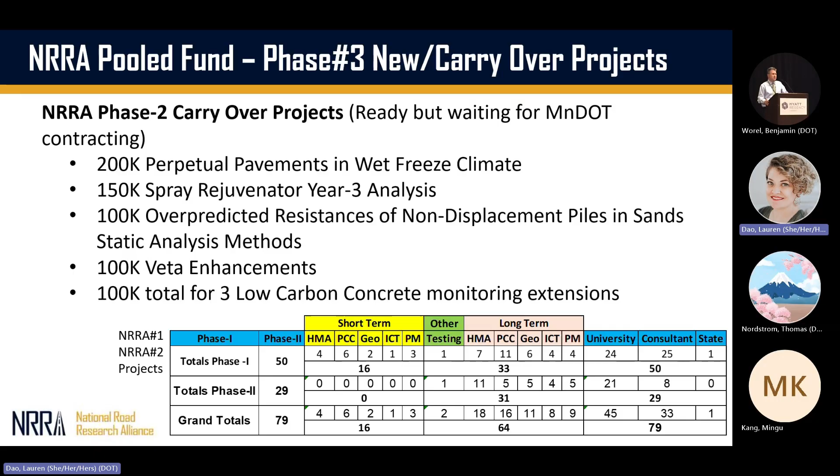So all of those are either in the process of consultant services releasing contracts, or internal MnDOT finalizing the RFP. So those will be finalized and posted within the next couple months.

The sooner the better, as far as we get our data, we get our plan sets, we can get everything moving, really working towards construction next summer.

So this call for research, there's a lot that still needs to be defined as far as the formal call. We're going to be having an executive committee meeting in the near future, kind of defining the parameters of this. But this could be research only projects, doesn't need to be MnROAD related. Really, it's the team's decision on whether they want to use that money for MnROAD related research or something else that fits their team's agenda. So it's really all going to be member driven as far as what projects get selected for research and construction ideas. So start throwing out your ideas, start planning, start brainstorming. As you're on the tour, start thinking of what type of research would really help you and your agency and your position moving forward as we start building this phase 3.

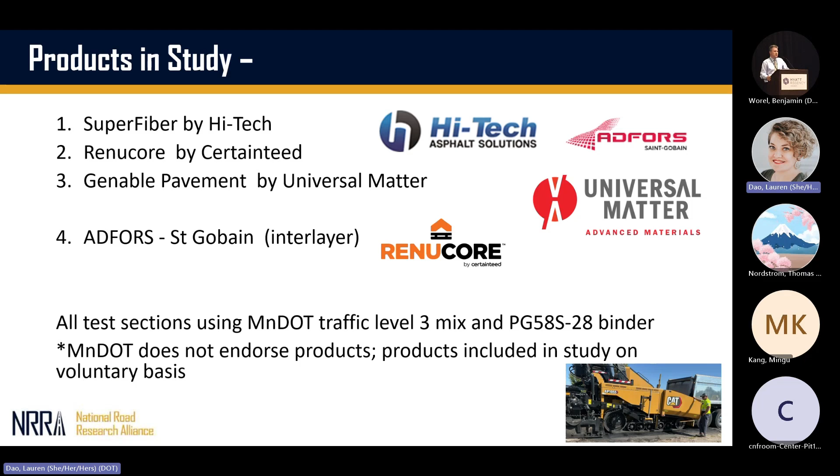We had Genable Pavement by Universal Matter, that's a graphene additive aimed at being an SBS replacement. And then an ADFORS St. Gobain interlayer, so between asphalt interlayer, looking at mitigating reflective cracking.

I'll show some of the construction photos real quick. This was all done with the Caterpillar paving team, milling and paving. So the partnership that we have with Caterpillar, the product participants purchased the mix from the hot mix plant and paid for the trucking, brought it to MnROAD. Caterpillar did all of the paving and compaction, everything else, milling on their own, with their team. So that was a nice tie with this, and we were able to cut some costs with that. So here's the glass fiber grid layer.

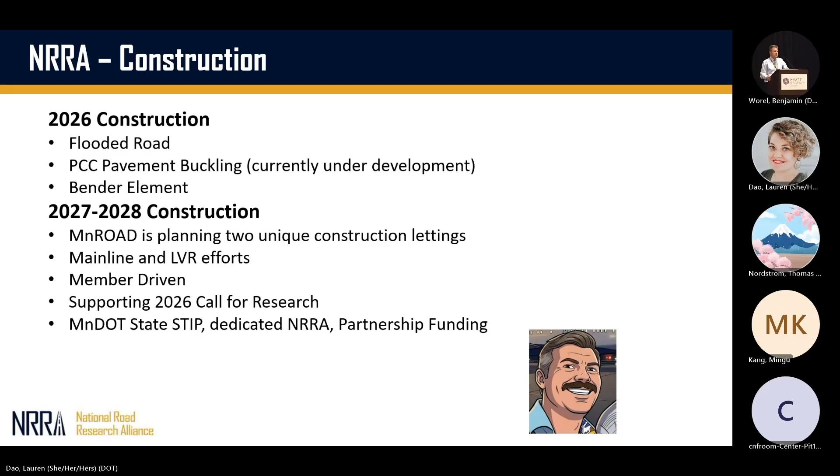Looking into my crystal ball of what we see, none of this is binding, just internal conversations we've had. 2027 construction is likely to be more rigid team, more concrete pavements than flexible pavements. The rigid team has a backlog, especially on the low volume road. With our CAT partnership, it's a lot easier for us to do smaller asphalt, low volume road experiments—there are a lot more asphalt pavers in Minnesota than concrete pavers. So it's easier to mobilize smaller asphalt projects than concrete, which means there's a bigger backlog of concrete test sections and experiments.

2028 also fits the cycle with the MnROAD and NCAT partnership. We'll be doing some new asphalt test sections as part of the MnROAD NCAT Next Pave Challenge. The way that study works, in 2027 they'll build test sections at the NCAT test track, and the following year we'll build companion sections here in '28, getting that north-south regional comparison.

I really want to encourage everybody to start brainstorming. We have some ideas to reclaim existing cells. We like to keep the balance between concrete and asphalt, reclamation and preservation, and geotech-specific test sections. We're not trying to dominate one way or the other—really want to start collaborating between the teams.

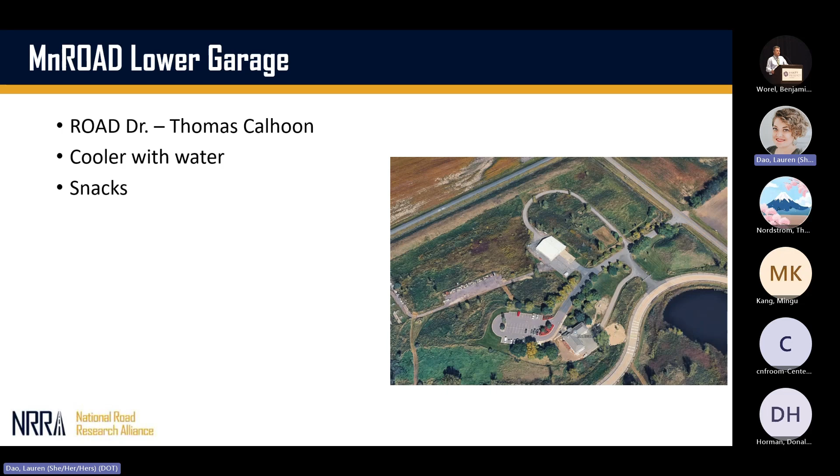We mentioned Renucore and Seismic in the main rooms, and we'll also have Thomas Calhoon with MnDOT's Road Doctor. We'll have snacks and a cooler with water - so this is really why we're driving.

Our first stop is the flooded road test section, which is in our stockpile area. To get there, we are traveling out of the MnROAD facility onto a public roadway. It's a mile away - we'll travel there as a group, but since it's a public roadway, we yield to public traffic. Then Jacob will talk in the stockpile area.

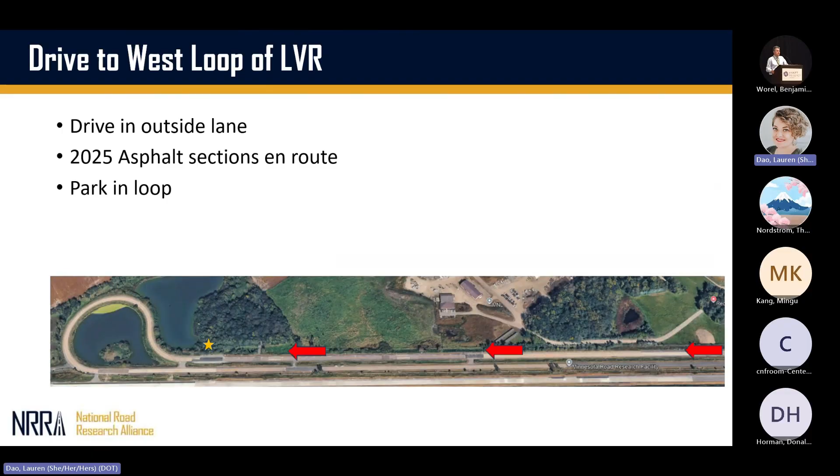Then we'll come back into MnROAD and Tom Burnham will talk some concrete. We'll move further down to Sharon and Raul, who will be installing the corner reflector sensors with the team from Auburn that we saw a presentation on yesterday. They'll also talk about geotech sensor stuff, and you'll get to see that corner reflector being installed. Then we'll make our way around the loop, talk asphalt and asphalt instrumentation, and head back to the building.

Last slide - I added a sling to this guy, so we miss you, Ben. We're thinking of you, and thanks.

My name is Joseph Podolsky. I'm the MnROAD Research Implementation Engineer, and I'm going to be presenting about data availability for the MnROAD database. First off, I'd like to thank Tom, who's here, and Mark and Ben, who's online, for their support and guidance through this whole process of rewriting everything dealing with the database. I'd also like to thank the other road research staff for their history dealing with the data.

Why does data availability matter? It matters because a lot of decisions at MnDOT rely on pavement roadway data. It helps for selecting and prioritizing projects and concerns towards CHIP and STIP, helps allocate funding strategically, and helps choose the right treatments. It also informs pavement material design specifications, like making changes within the specifications, and monitoring and forecasting performance. For example, the seasonal load limits shown here were built largely using data from MnROAD.

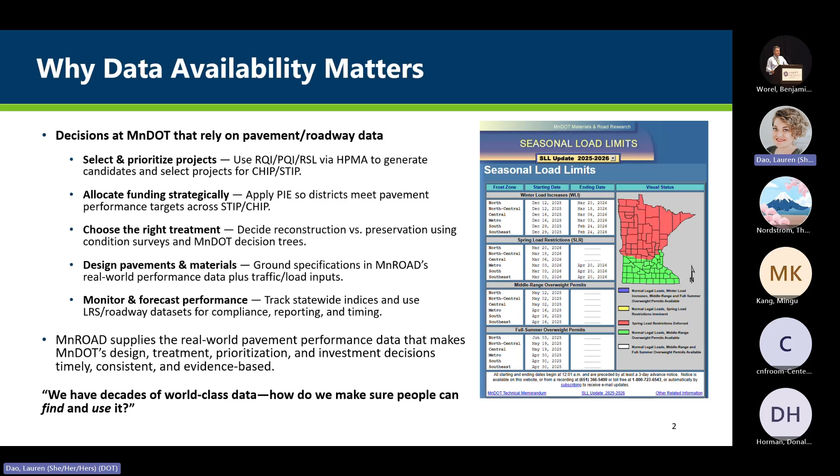We have decades of world-class data at MnROAD - how do we make sure people can find and use it? That's the biggest question. What's inside the database? We have materials and lab results, instrumented sensors with static and dynamic data, and traffic and loading data. Right now the traffic and loading is just the I-94 main line and the low volume roadway. We also have past data from Old Westbound, but that's no longer going to be part of MnROAD. We also have two on-site weather stations, and the bread and butter is the performance monitoring.

So we get distress, ride, rutting, all of that stuff. And then all this is integrated via InfoPave through the LTPP. And then you can search and look for and download the data. You can also request data from the MnROAD staff as well.

So when you make data requests, there is a request page online, but you can always contact Ben, Mike Wallace, or myself if you need something more specific. Because sometimes when you go through that page, you might say, I want everything, but then you're just gonna hear back from us asking if you really want everything, because you don't know what's in there. So it's good to talk to us first sometimes before you request it.

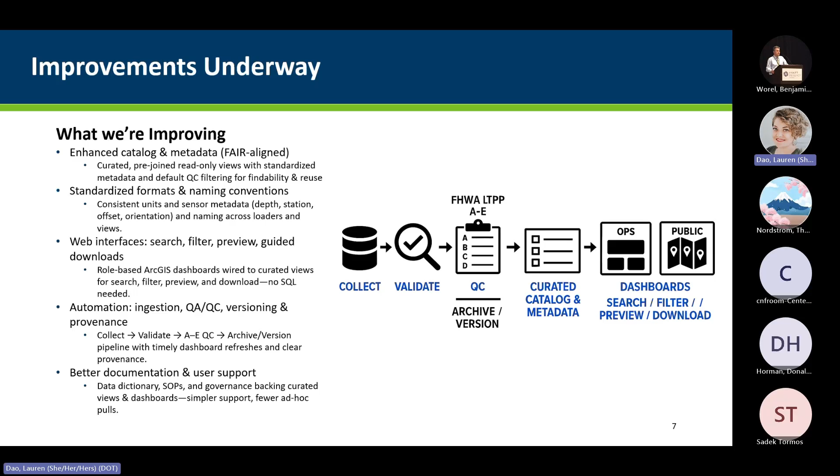And then as part of this process, we're also going to automate our loader a lot better. And then we're going to improve quality assurance and quality control checks. So we're going to add more of them onto our data, so that way there's a quality check, like there'll be a value added to that data in another column. So then you can be reassured that the data is high quality.

Also, if people get data from here, they can use the MnROAD IDs that are attached with those samples, so that way it's a lot easier for us to figure out, when people do publications, that we can connect that to a study. Because we're also trying to add a table that connects different papers and reports to different test sections.

So the value to MnDOT and NRRA is we're trying to move towards the direction where we can do faster analysis and better decisions. We want to reduce the rework and duplicated effort. We also want to gain stronger collaboration with partners, both internally within MnDOT and nationally as well. And then we want to have more impact from past and ongoing investments.

So how can you all, I guess, help us as well as us help ourselves? It's share priority research needs and data use cases. Like, what data are you actually asking for, or what would you be interested in asking for? Not many people look at the database that often or really deep dive into it. They don't know what's there. There's a lot of useful data in it. It's just very underutilized right now.

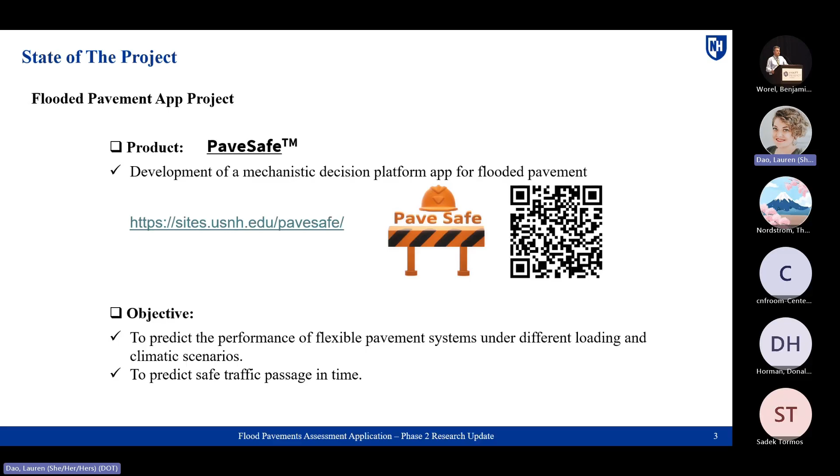The QR code brings you to the website, and basically there are publications there and everything related to phase one. You can download them. So version 1 is already available. The goal was basically a decision platform for flooded roads and also to help us predict the performance. The focus was mostly on flexible pavement, for different loading and climatic scenarios, and ultimately to predict safe traffic passage.

The first phase of the project was a lot of system analysis. We wanted to see what the key influencers are in this whole analysis, and we spent quite a bit of time on the system dynamics analysis. Then we did different types of single variable and multivariate sensitivity analysis to identify and rank the important parameters impacting the response of the pavement after flooding and during flooding. And that led us to version 1 of the PaveSafe app.

Basically, it's designed to be simple but mechanistic. There's lots of mechanistic modeling behind the scenes, but the face of it is pretty simple. Just put in the pavement information, the structure, the geotechnical information, your precipitation scenario, your traffic type, and you can define the threshold and say, okay, it's open for traffic after 24 hours, after 48 hours, flooding and rain. Maybe you have 2 consecutive rain scenarios back to back. All of that can be modeled. I'm not going into detail on the modeling piece. I just wanted to introduce how the software works.

Then we got phase 2, where the focus was mostly on computationally enhancing the model and the application, and also using the available data to validate whether the performance is really good. There were different tasks. We are almost toward the end of phase 2 as well. We wanted the experimental and numerical part to be robust, so it took a little longer. We are hoping that sometime at the end of summer we are done with this project, and the actual platform for version 2 is already ready. We're just waiting for the final independent numerical model to finish so we can do final validation and release it. Otherwise, the actual platform for version 2 has been ready for a few months.

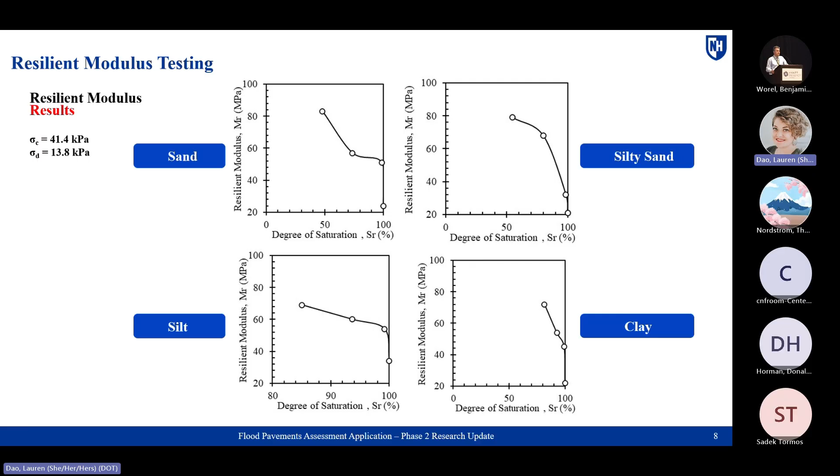This is probably something other people have done, but we wanted to have a good idea in our model, and we could see that as the degree of saturation gets nearly saturated, the resilient modulus drops quickly. That's intuitive, and I'm sure a lot of other researchers have seen this.

The part that took a lot of time, we wanted to do more physical model testing. We built a setup at University of New Hampshire, and we wanted to not only load and simulate a traffic scenario, but have good instrumentation so we can capture the response.

The setup is basically a pit with soil in it, and at the bottom we have a network so we can drain and insert water to control the water table. There's lots of instrumentation in and out. This is the actual hydraulic actuator that we control, and we can apply any type of transient load that we want.

So there are different types of scenarios. We have load sensors, moisture sensors, and a laser transducer at the surface to capture the surface profile. We also had pressure sensors to see how the pressure profile within the soil is - that's important. And we have pore pressure sensors for the tests that are fully saturated, to see how the pore water pressure changes because of dynamic loading, which could cause liquefaction in the soil. So these are the sensors we have.

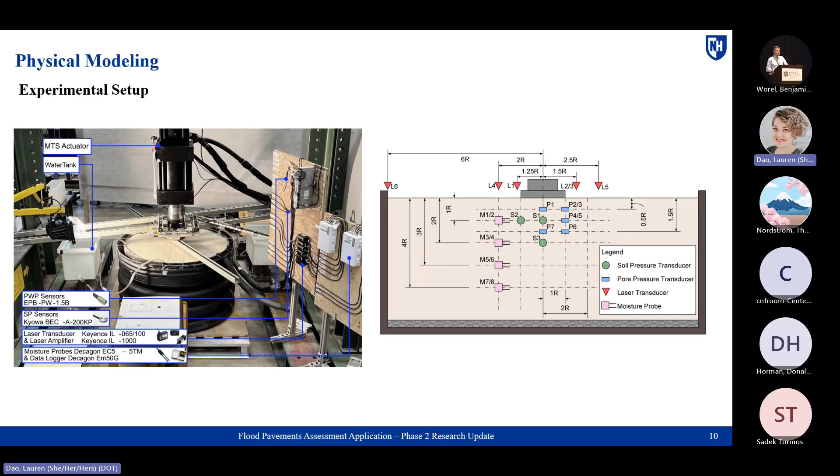This part, the task is complete. The report is on the NRRA website. If someone is interested to get more detail on the results, I'll just review some of them. Basically we did about 32 tests.

We did relatively large scale physical model tests on sand and clay, at dry, optimum compacted, off of optimum, and fully saturated conditions, and we controlled the water table and ran salt tests to see if the water table moves. We apply a half sine cycle with rest time between to replicate traffic, and we measure surface settlement, vertical settlement, stress propagation, and pore water pressure - all of them.

A few of the results, for example, this is the results of one of the pressure sensors. Each box is for a different degree of saturation at shallow depth. On the left side, these are all the inputs, the envelope of cycles. We apply 105 cycles of pressure, but if you take the envelope, the peak of those, there's a delay because it densifies at the top - it takes time to reach that 100 kilopascal. Interestingly, for different degrees of saturation, what the sensor measured was either higher or lower, and that's because of the stiffness of the soil. You may have a lot of relaxation in the soil, or you may have stress concentration in sand and other materials - different materials behave differently.

This is also discussed in soil mechanics textbooks - if you have a rigid foundation versus a flexible foundation, clay versus sand, the stress concentration at the middle and the edge are different. This is traditional soil mechanics that we teach in all the classes.

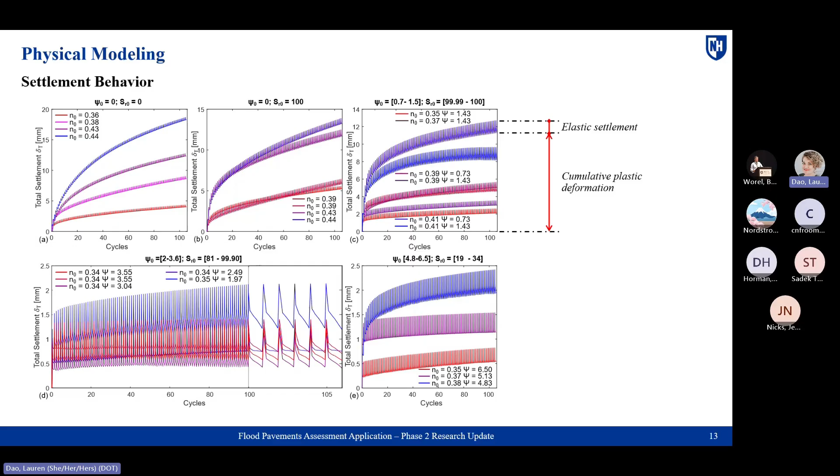And with that, we could define two types of stiffness: the secant stiffness, which basically considers all the deformation, and the so-called resilient stiffness. We looked at how that changes with respect to porosity and the suction level, which represents the degree of saturation. It makes sense that as you increase suction from left to right, you have more stiffness, since the soil is stiffer. We defined the suction as representing about half a radius in the surface near the foundation.

The other piece we try to understand is the surface profile of the loading, because we have a laser transducer across the surface. As we load, we could match or curve-fit these deformation profiles. We could see how that profile changes based on different porosity and different degree of saturation. That's another piece, but I'm not going to go through all of it; I just want to show what's in there. If you're interested, the experimental part alone is about 200-300 pages of documentation.

Another interesting piece we were really looking into was the pore pressure sensor data. We have pore pressure sensors right underneath, on the side. There are interesting things we observe. Of course, we expect that as you load it, the pore pressure goes up, but during the unloading phase, there is a movement of water, meaning the pore pressure reduces as well. That's something we're also seeing in the numerical part, and it's really hard to capture in a numerical model. So that's one piece we are working on.

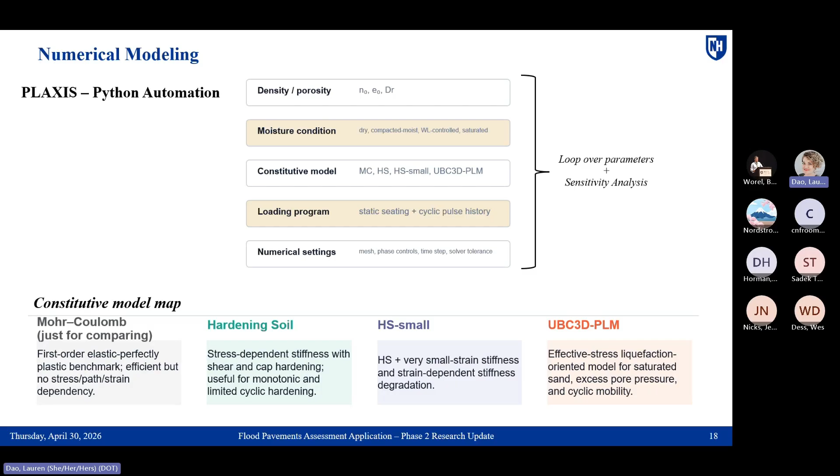There was a lot of challenge because the deformation is large at the very beginning, so it passes the yield point of the soil, and every time you load it you get a lot of plastic deformation. So we needed to adjust the soil strength properties a little bit so we could trigger the hardening every time. That took a lot of time.

We got some modified system that now works well. If you look at the hardening soil, shown in green, versus hardening small, the hardening soil model used to jump into large deformation without a nice transition. This report will be very interesting, with lots of geotechnical and geomechanics modeling in there. We are very excited about the results. Now we can capture the hardening response, and we have more permanent deformation at the beginning compared to the last cycle.

After that, we do the sensitivity analysis. This is ongoing, and hopefully within a month or so, we'll have the report ready for review by the team.

So the PaveSafe version 2, as I said, the platform is ready. The goal was to basically enhance what we have, the user interface, and also a lot of validation.

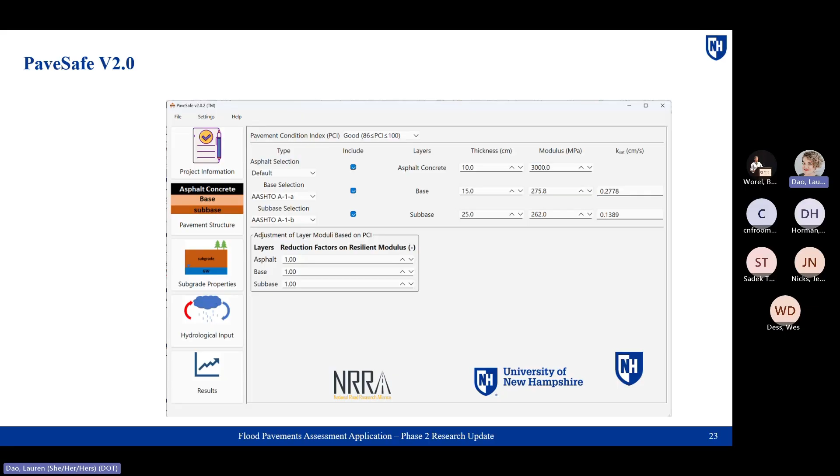We did a lot of searching across the country. There is not a well-instrumented system that we could use to validate. So we have the physical model, we have the numerical, those are good validations, but it's still not enough.

So this is a run of the new version of the app. It just shows different components, and we did a lot of different pieces in it. Basically, the geotech piece, the structure piece, the scenarios, they're all more advanced.

Computational is much more faster, and then you can put any precipitation scenario you want. We added even custom loading scenarios. You can put your loading scenario, you can put FWT, all of that.

So at the end, it tells you the road closure, caution, should be closed, all of them. And basically, as I said, the platform is ready. We're just waiting for the final validation, and we'll hopefully release it sometime end of summer.

So lesson learned, just because the session is lesson learned: there's lots of fundamental and practical knowledge developed just for understanding the response. These are available in publications and reports. If you are interested in this area, I encourage you to look.

You have the app, that's the product, right? It's good to have research that ends up in a product. Version 1, and now version 2 is coming.

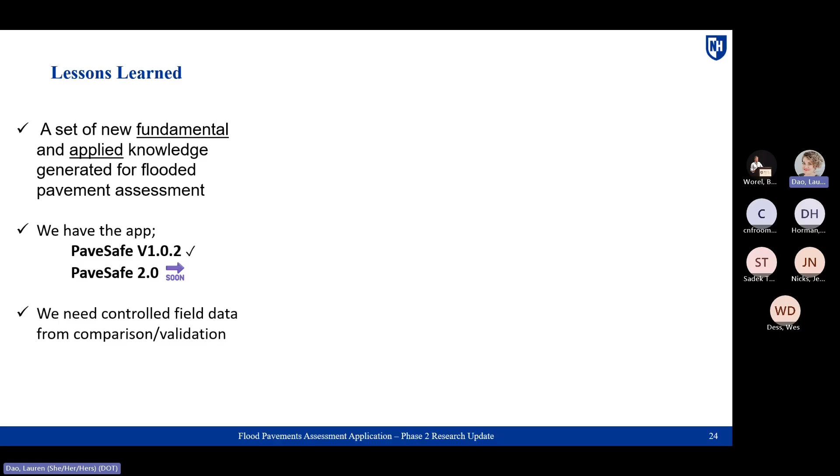And then lesson learned was we need a controlled field validation system. The flooded road section is perfect. I gave the lesson learned to AI and it gave me this.

So the flooded road section that you are going to see will hopefully provide a good tool, not just for this research, but for any other person who is interested in investigating it.

And it's interesting that the UNH team doing the analysis, they have a coffee. They even think that when you do modeling, you need coffee.

So, and I'm available throughout. If you have questions about the app or anything else, I'm happy to answer.

What we have is research on the water repellency technologies and the section that was built at NRRA, to check if it works or not.

And we have two researchers from Michigan State, Qasim and Mohammad.

I don't have time to check with Qasim because Qasim has a military background. I think you're a colonel, right? No, major. So I think he's gonna be... Thank you so much. That puts me under more pressure, I guess.

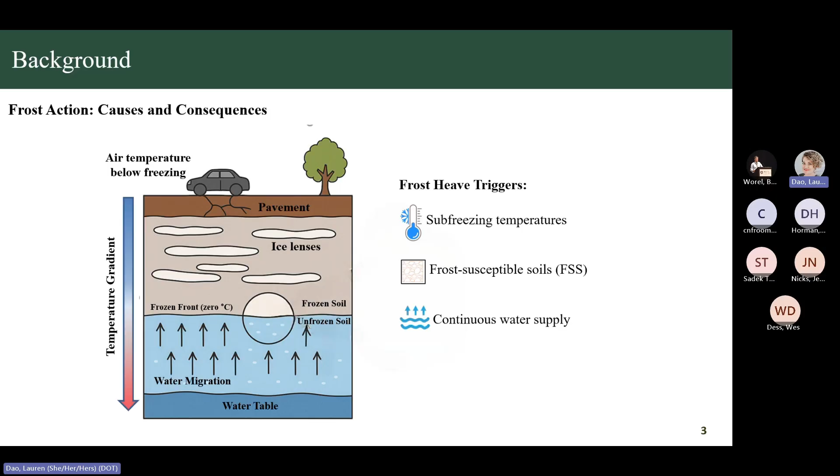We do that with the application of an organosilane chemical that is sprayed on the soil layer, which ends up acting as a capillary barrier for the water.

This stops the capillary movement of water toward the top of the pavement layers, and we call the complete mechanism engineered water repellency.

So as I said, we have to treat the frost susceptible soils with organosilane chemicals. How the chemistry works, I'll briefly tell you. We have this silicon-oxygen-silicon bond formed once the organosilane reacts with the surface of the soil layer, and it forms a dense, thin, water protective layer which makes the layer hydrophobic.

Once applied in the field, it results in controlling the capillary action of water from the unfrozen soil layers towards the frozen soil layers. So I come to the goal of our presentation, which is to evaluate the use of organosilane to control water and increase the overall pavement performance.

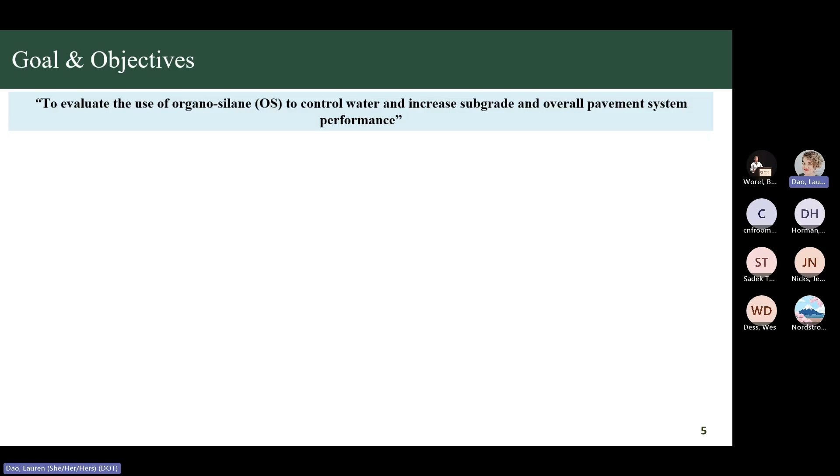We have different objectives with this goal in mind, starting with soil characterization. As I mentioned, this is a silicon-oxygen-silicon bond, so it's important for the soil to have silica-rich chemistry.

Since these sections were being constructed at the MnROAD testing facility, we collected soil from the testing site and ran XRD and structural analysis, and we found out that the soil is indeed silica rich.

After that, our colleagues at the University of North Carolina, Charlotte ran physics-based models to come up with an optimized depth for the application of the EWR treatment. They came up with the number of 3.94 feet.

It's important to note that this number is not a design depth that we're recommending to users, but it was the number we used for our construction of the testing sections at the MnROAD facility.

So we went ahead with that number and constructed two cells, a control section and a treated section at the MnROAD facility. Both sections had Class 5 Q aggregate as a base layer, and had a combination of different sensors: moisture sensors, matric potential sensors, along with the shape arrays.

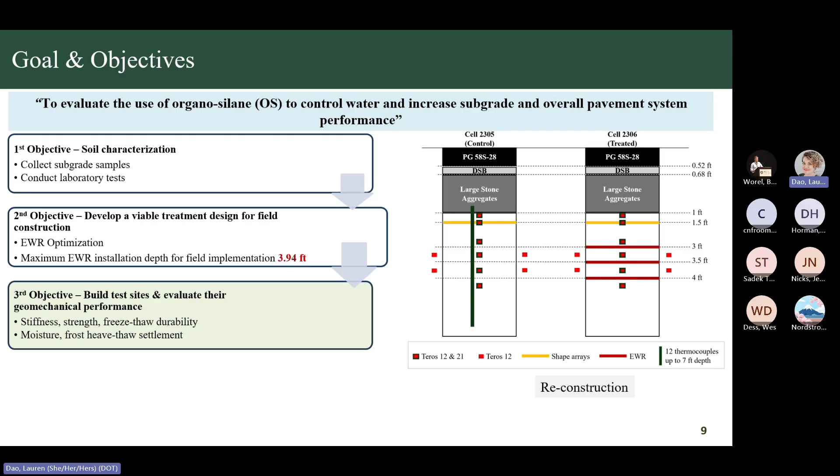With that, we started collecting measurements from the moisture sensors and temperature sensors, and then we went ahead with the modeling part, which will be explained by my colleague here.

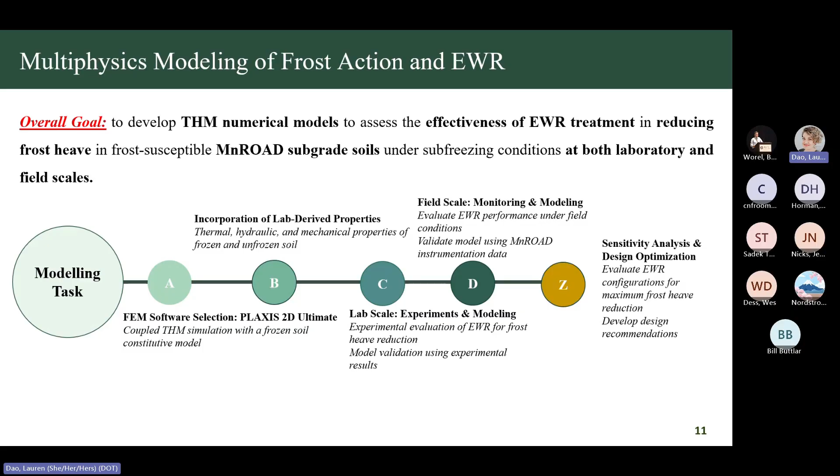Now for the field, it's a little bit tricky. How do I select the geometry and boundary conditions? But we have sensors and some analytical solutions to find the depth we actually need to model, based on where the temperature is constant and not affected by seasonal changes. We have much more detail, and we're writing the report for this, so it will be published soon.

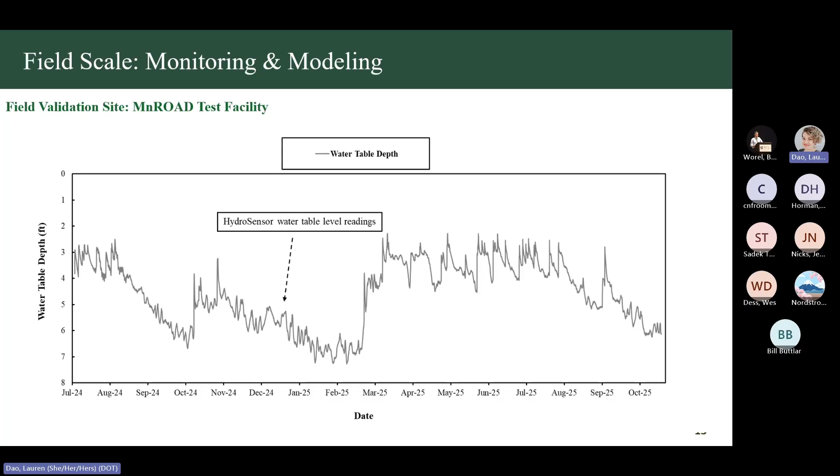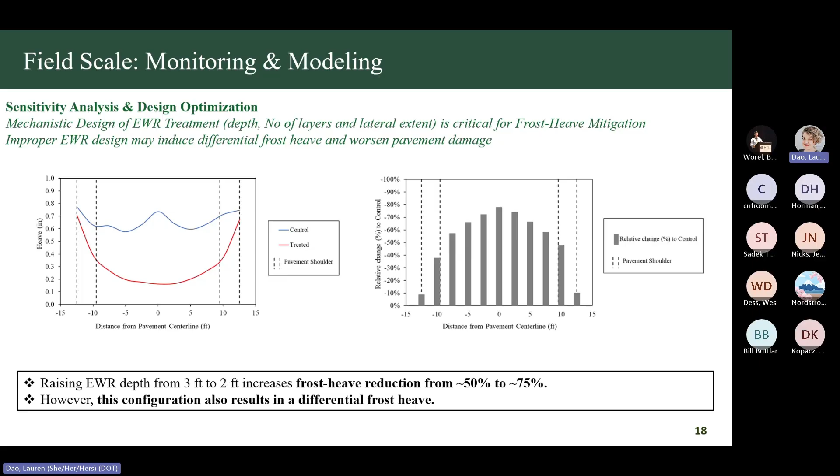So we did a sensitivity analysis. For example, raising the EWR up 1 foot showed now 75% reduction, but we still have differential frost heave. So what's the solution? We found the solution is to laterally extend the EWR past the pavement shoulders. Now you'll have about 90% reduction in frost heave, but also minimal differential frost heave produced. So the lesson is that EWR really works, but it's a little tricky, so you should design it carefully.

And the mechanistic design is more important, like how many layers, how much lateral extent you should use. And as I said, improper EWR design could cause differential frost heave. And lastly, lateral water movement is important in frost heave because once we block the water from the bottom, the water was building up above the EWR layers.

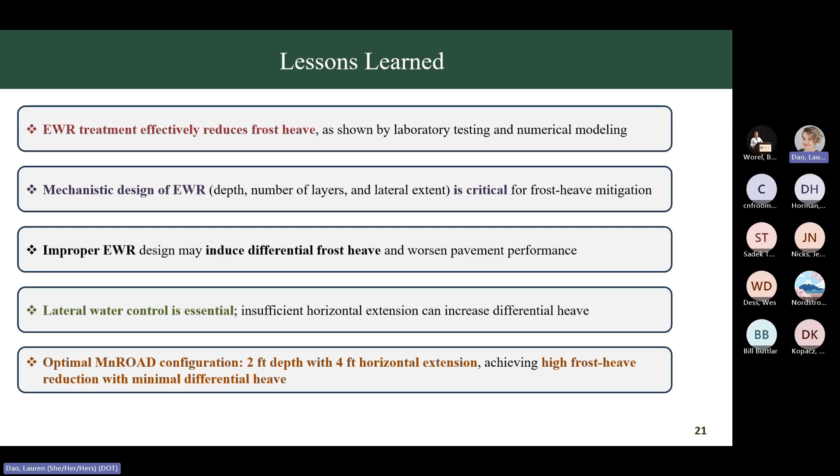So finally, the optimal MnROAD configuration based on the suggestion from the model is 2 feet depth with 4 feet horizontal extension to achieve the high frost heave reduction.

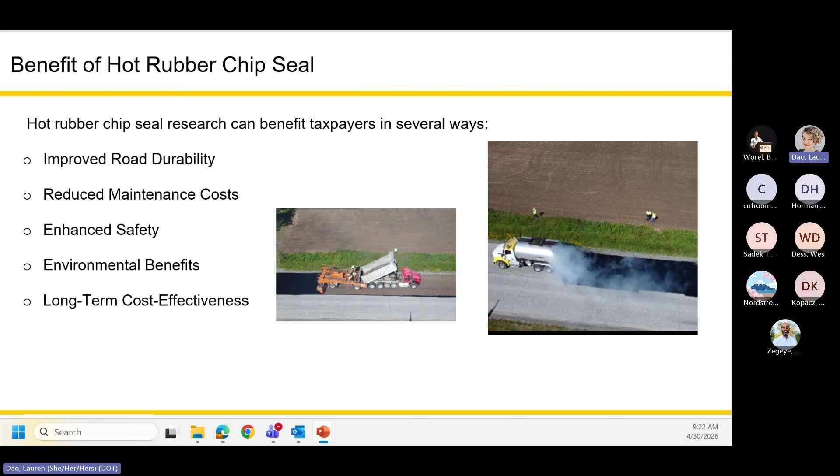So of course, one thing we find out is it improves the durability, and the maintenance cost in general is going down, and it enhances safety. Of course, there are a lot of other benefits like long-term cost effectiveness. So that is according to some work we did with counties and cities.

So the research work here, the major report we have here, one is really about literature review. We continued the literature review effort and constructed lab testing protocols, and then did the field construction and also field testing. And right now we are in the final data analysis and preparing the final report.

So over here, the rubber content added to the liquid is about 22%. Of course, we can run up to 25% in the past. So this kind of asphalt is going to be high viscosity. Of course, we did a lot of other testing, and I will show you that in a second. And in the project, we also used some control sections using the conventional emulsions, right?

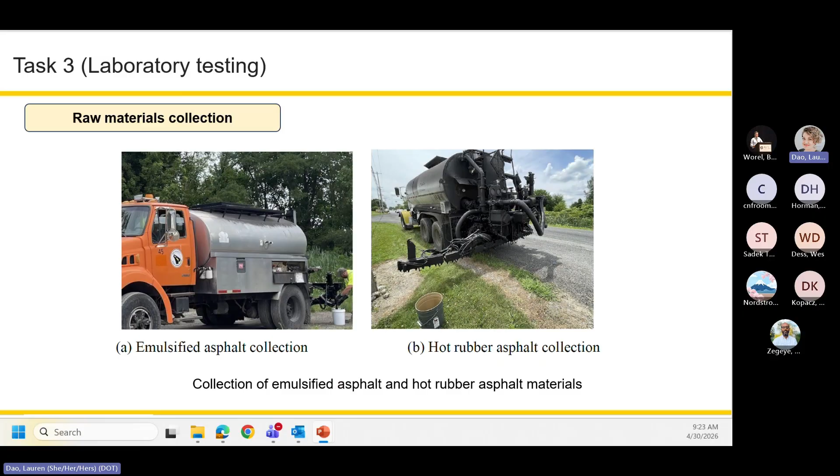And for the emulsions, for the chip seal side, we did a lot of other testing, including the sweep testing, surface friction, and of course, the fun testing we did was the strength. So we tested both the tensile strength and the shear strength. We will have that data in just a second.

So for example, this is the sweep test. We are trying to make sure there's no aggregate loss after this many cycles of sweeping, and also test the surface friction as well. And one of the tests we did is freeze-thaw testing: 6 hours of soaking in water at room temperature, then freeze it at minus 18 degrees C for 6 hours, and then thaw it again for 6 hours.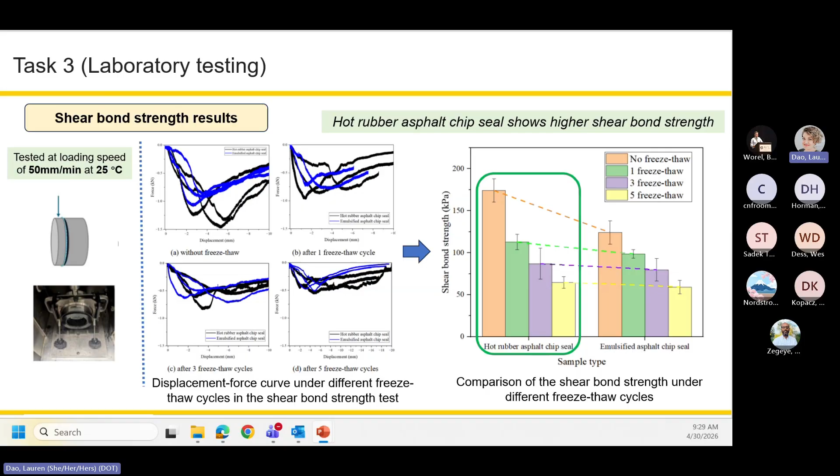All right, those are 2 major tests we did. We had a large amount of testing, and we took pictures of those samples, and that is basically the in-house testing. And then we moved to the field. The test section we built is in Bay County, M-25. The traffic on this road has picked up. It's not really a heavy traffic volume road in Michigan, but it's a pretty decent traffic area. So location-wise, it's pretty ideal for the construction.

This is a 2-lane road, roughly about 6.6 miles. What we found out is the first 5.6 miles or so, the condition was a little better, and the other stretch, the condition was not as good. The PASER rating is very low. And of course, Tyler has the IRI and all those data, and we're going to use that for the report as well.

So what we did here, the first segment, roughly 5-point-some miles, is using rubber asphalt with coated aggregate chips. And then the last section, we used a different design. We're trying to give different combinations of strategies. So here is a really quick video showing the construction.

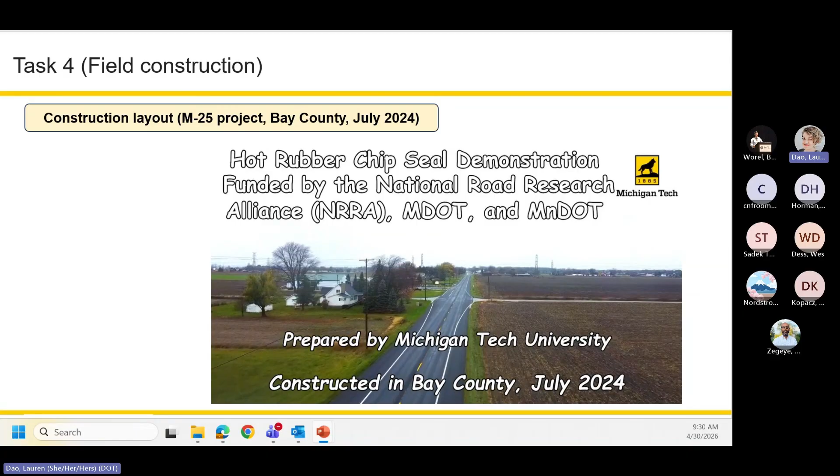If this thing can show, looks like it's working even though there's no sound, but that's okay. I did use AI to make some interesting things there, but we don't have to hear that.

It's one of the decent projects we did. Like I mentioned, we've built 300 lane miles already, and this is part of our plan. This year to 2026, we're going to have more construction ongoing. This is the rear truck. The truck needs to maintain the temperature so that the rubber asphalt stays workable. This is the plant where they prepare the coated aggregate chips. This is not required, but I think it's a good way to make sure we have good retention of the aggregates.

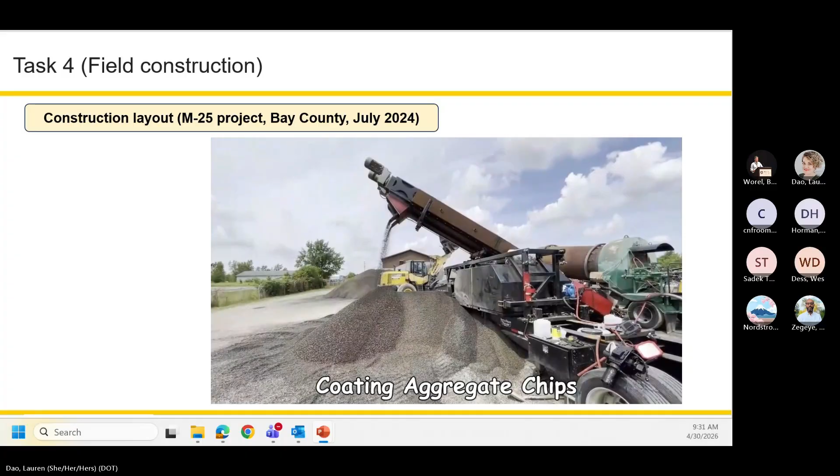One key thing here is the asphalt content should be low, not too high. In the construction site, you can see we're starting to spray the hot rubber asphalt. For this road, we're spraying roughly about 0.55 gallon per square yard, so it's pretty thick rubber asphalt.

Those are vapors. The temperature here right now is pretty high. We are also working to see if we can reduce the temperature. Right now it's running about 400 degrees.

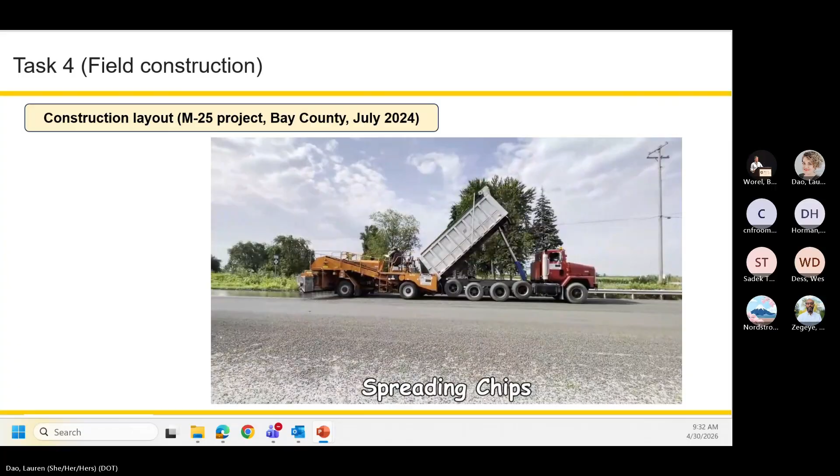This is how we spread the chips. You don't want to step your feet on the asphalt. After the chips are spread, we just do the compaction. After the chips are spread, we just do very light compaction.

The construction can be really fast. If we planned this 6 miles of stretch construction, during the entire construction it's very short. If you just come there late, the things are finished already.

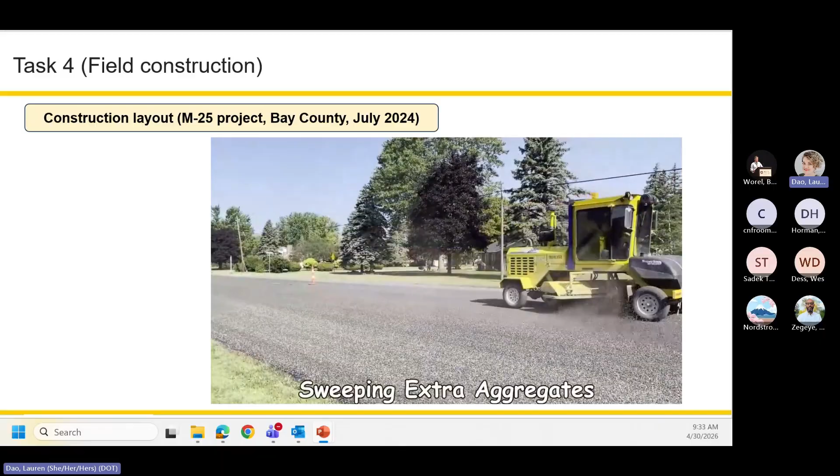The last step is sweeping, just to make sure there's no excessive amount of aggregates. Usually we don't apply too much aggregate here. So that's pretty much the construction.

All right, I'm going to click the next one. So what we did is after the construction, we also did some other testing. Tyler is doing other testing, but we did some smaller testing, such as the field pull-off testing. After the construction, like 3 days later, we did the pull-off testing.

It's almost like a tensile test, bond strength testing. But the thing is really hard to control the temperature, because whatever temperature we're given that day, one spot is 13 degrees and the other spot is 116 or 117 degrees, whatever temperature we have. So we just measure those strengths.

You can see the pull-off force is roughly 220 or 240 something PSI, and then we get the average number. So what we have here is that the rubber asphalt gives pretty high numbers. We do have the conventional asphalt as well.

I mean emulsions - for example, this one is after 3 months of construction. You can see the emulsion-based one at 77 degrees Fahrenheit was 332. But under 86 degrees Fahrenheit, the rubber asphalt was 345. So no matter what, the rubber asphalt still gives you a pretty high pull-off force there.

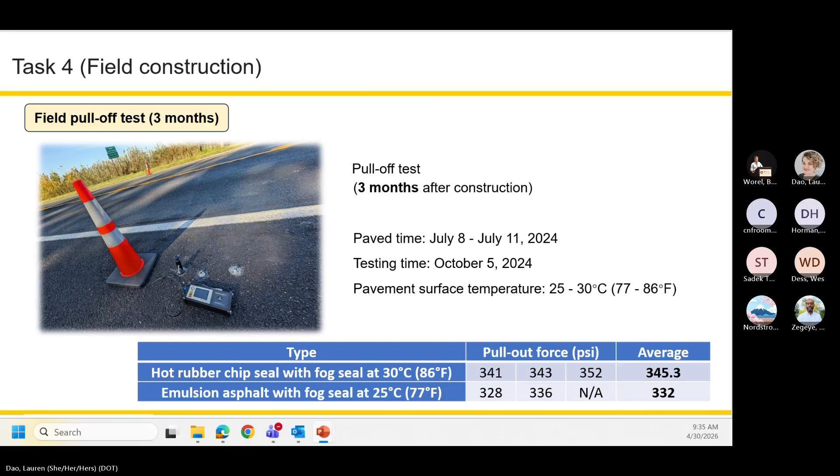With that, we are closely working with Tyler, and I appreciate the effort - NRRA for supporting the project, and also MnROAD for helping this one. So with Tyler coming up here, we have a really nice team, including people from different states. That's all I have.

I can - Tyler already volunteered to answer any questions or give any remarks. I was supposed to moderate you, and I apologize. Oh, I did it by myself already. Up for it now - anyone have any questions for Dr. Yu?

That's a very good question. So we actually measured those things, yes. I think roughly about 80% or so. Thank you.

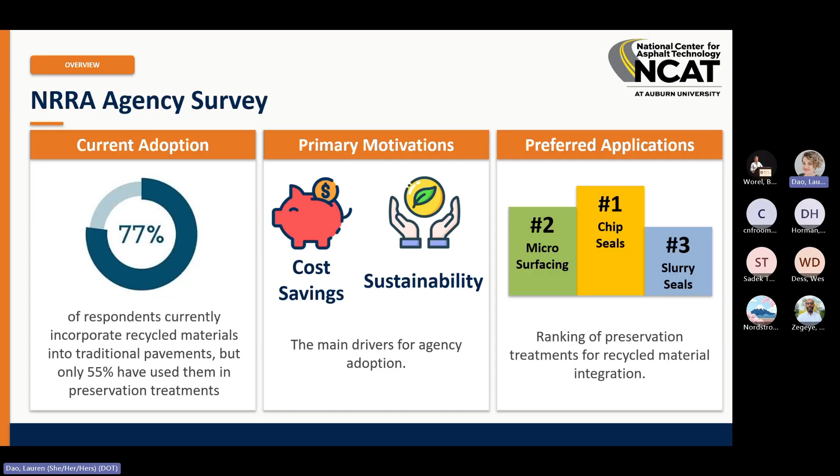Once we started looking at the responses, that included things like, well, we've used RAP in a thin overlay, or we have done our hot rubber chip seals. So we wanted to see other types of materials that we could put in there. The primary drivers for doing so for any agency would be mainly cost savings and sustainability benefits, that was the most important part. Also how the agencies rank how they would want to use the recycled material: the top application that they saw was chip seals, then microsurfacing, and the third is slurry seals.

We did a lit review, and some of the more common types of recycled materials we found would be RAP, recycled tire rubber, and RAS. With RAP, that seems to be the low-hanging fruit. It's highly abundant, it can replace up to 100% of the aggregate in either our chip seals or slurry surfacing systems. Some preliminary findings saw similar or better durability, but there are things to be careful with, such as requiring more cure time, for example.

With tire rubber, also commercially available. If it's an emulsion, it's a little harder, the process for emulsifying that rubber, but some people have had to play with that. They can also be used as an aggregate substitute, or like a mineral filler or something like that. It helps with aggregate retention, it helps with cracking resistance, but it could be a little challenging during construction. And finally, for the shingles also, they're available, but there's limited data, especially for any preservation applications.

It could be that we use them in a slurry surfacing system again, like some sort of mineral filler. They showed lower cohesion, but there wasn't something where you could just replace all of your aggregate with shingles. It was somewhat of a blend.

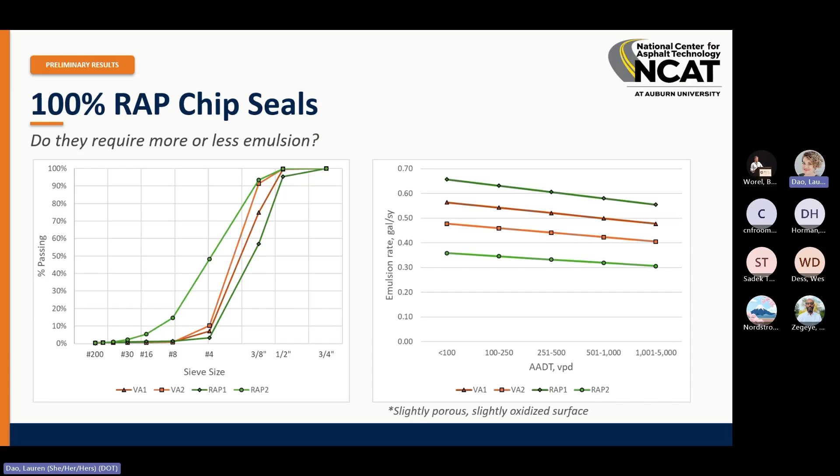So looking into our 100% RAP chip seals—do they require more or less emulsion? Well, it depends on the RAP and it depends on the virgin aggregate you're comparing it to. A lot of that also depends on your gradation and material properties—things like loose unit weight, specific gravities, all of that comes into play. But if you run this through your conventional AASHTO design, you'll get different answers. So nothing really clear there.

We ran 100% RAP chip seals and did our sweep testing. What we saw is that normally we'll have similar or better chip retention with the RAP. It was pretty low, our loss of material anyway. I'm not much of a fan of the sweep test—it uses a predetermined amount of emulsion, so it's not really reflecting your material proportioning. But nonetheless, it's the test that's standardized and available, so we ran it and saw good results using the 100% RAP.

So what else could we do with our chip seals? We've seen that 100% replacement works—some agencies already do this. So we started to look into recycled tire rubber chip seals, trying to replace some or all of the aggregate with recycled tire rubber.

I've been talking with a rubber supplier, and they do have minus-1-inch material that's available. The thing is, it's pretty elongated—about half an inch wide but about an inch long—and that's obviously not what we want for chip seals, which need more of a cubical type of material. So they said they could further process this, maybe run it through another shredder, and try to give us material that's more like 3/8 of an inch, more cubical particles.

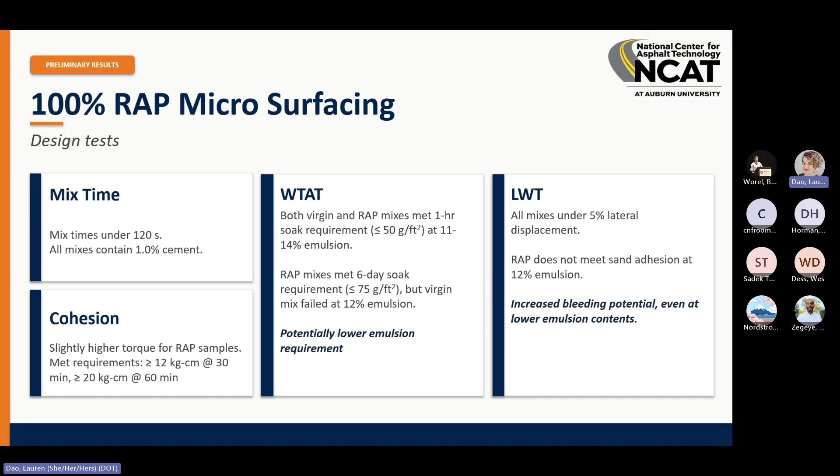But for the sand adhesion test, which tells us about the potential for bleeding, the RAP mix could not meet the requirement, even going as low as 12% emulsion. We're looking into getting some additional samples to see if we can go any lower, but there's only so much lower you can go. That's just telling us there's an increased potential of bleeding, even at lower emulsion contents.

More than that, we have heard concerns that at high temperatures, that RAP may become activated, to put it that way. When we're using RAP in our surface treatments, it's not the same as when we're doing hot mix - we're not thinking about blending or things like that. But we do have to acknowledge that high temperatures may soften that binder and the RAP and somehow affect performance. So we ran the loaded wheel test at high temperature, at 50 degrees, just to see what would happen. We definitely saw much more deformation and displacement with our RAP samples at the same asphalt content, so again, it could be a concern.

This is not necessarily part of the design, but we tried it just to see if there was some susceptibility in there. We thought maybe we could try a 50-50 blend, and that way we're still using some recycled materials, but more effectively and without any performance concerns. So we've been working on that 50-50 blend, using 12% emulsion and 1% cement for these cohesion samples. Everything's meeting the requirements so far, so that's good.

We have some testing underway with the wet track abrasion. We completed the 1 hour soak results and everything is well under that maximum limit. The 6-day soak samples are soaking right now, so I don't have the data yet, but we'll see. Hopefully it seems promising that we can at least use a portion of RAP to replace that aggregate.

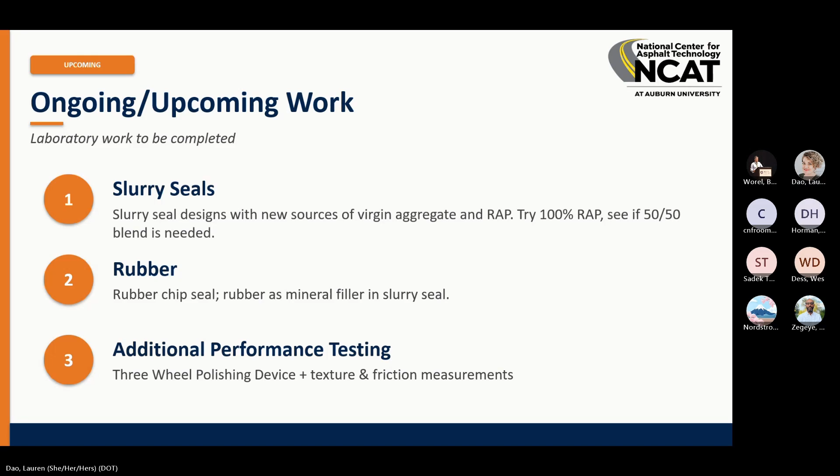Now, the main challenge, and I think the main takeaway that I've personally taken from this, is that timing is everything when you're working with asphalt emulsions. One thing we ran into is we're working with materials - our aggregates and our RAP, for example, for the microsurfacing - all coming from Ohio, and we got the emulsion from Ohio as well, formulated so we know it works well with those materials.

All that's really good until construction season ended and there was no more emulsion production. So we kind of stalled there for a while. We had been waiting, and they just restarted production of the emulsion a couple of weeks ago.

So as soon as they had it, we got some more emulsion sent our way, and now we're working full steam ahead to try to finish all of that. But that's very challenging because with emulsions, they have a limited shelf life. You can't just stockpile a bunch of it and try to use it. It'll go bad at some point. So trying to depend on people to provide those materials and us being able to get the workflow going. But I think we got it on a roll, and things are looking much better, and we're trying to catch up.

But from what we have seen, there is potential to use our recycled materials. What we're trying to develop is some sort of framework so that if in the future you want to incorporate something new, this is the process you want to follow to evaluate that and see if it's feasible or not. And with that, I think we just got caught up. Thank you.

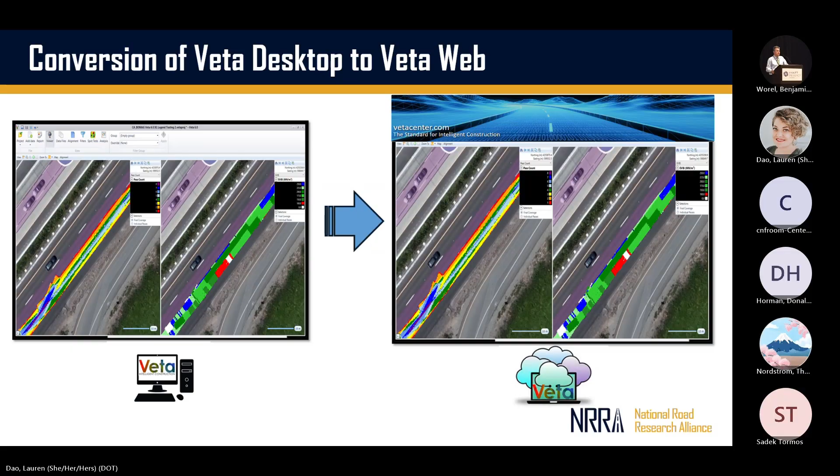So I do want to touch again on the MDMS updates. Remember, that's the expanded form of e-ticketing.

So as George mentioned, we are doing some testing. So we're working on some receiving exchange data. So what happens is we have a vendor that has an e-ticketing MDMS system. They're AASHTO compliant, and then we can receive that data into Veta Center. So again, any vendor, AASHTO compliant, they'll work with the Transtec Group.

Part of the reason why we're doing this is to work on the APIs so that that data does make it through the exchange and it does show up correctly. So there's a little bit of testing. We have been doing that at MnDOT, and we hope to expand that out to several more vendors, more projects, and then hopefully some other states later this season. Also to note that the goal is to do structural concrete data as well, in addition to bituminous.

Let me just throw out another note that there was a big effort to develop the AASHTO standard for MDMS. And remember that that's a big, broad list of information that could be useful, but it's kind of an a la carte system for each individual state that decides what's important to them. They can pick and choose those items that are important to them, and then use it for MDMS.

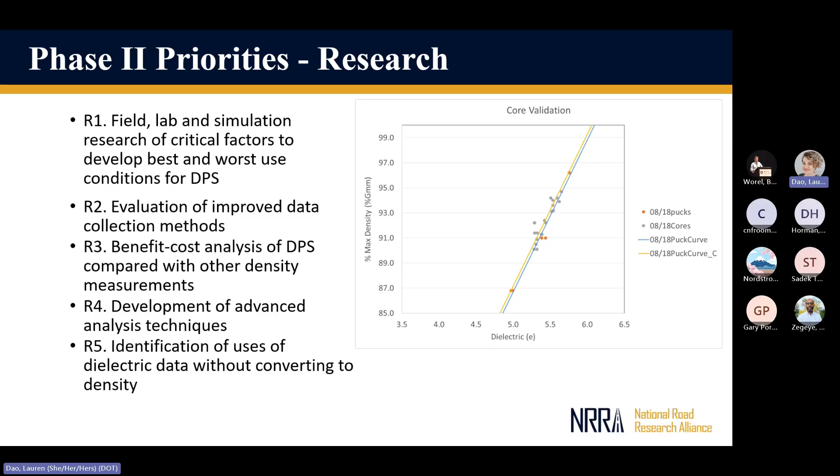So on the research priority side, it's developing best and worst case conditions for the use of DPS, evaluating improved data collection methods, comparing the DPS to other density measuring devices and technologies, other advancements to analysis techniques, and then uses of the dielectric measurement without converting it to density. So besides the research priorities, we also have implementation and marketing priorities.

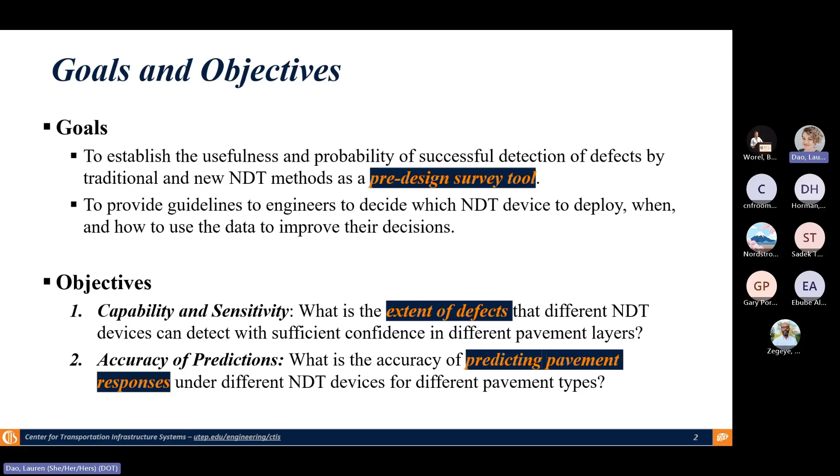And if you look at the objectives, first, if you're looking for the defects in pre-design, what is the extent of the defect, and how defective does it have to be so that you can find it. And then the next one, if you're doing back calculation and all the good stuff that you're doing, how good are you doing? Because you just go through a non-unique process, and are you getting the strains that you are seeing in the field, so on and so forth. So that's what we do.

So we had 7 tasks. Some of them were not technical, like you omitted over here. The main one is that we put a technical advisory board together. That was the first task. That was technical, so that we can get feedback. Documentation of knowledge, strengths and weaknesses and limitations.

Obvious, but as part of that, we sent a survey out, and we were lucky enough. Jacob is high up in AASHTO, and he sent it to all the DOTs. So the survey that we got is very useful if you want to look at it. We had almost 42 states respond. We usually don't get that much, but thanks to them, we got it. So we used that to develop a plan and essentially prioritize what equipment we want to use and what defects we want to address.

And I'm going to focus on the results of that plan that we came up with, and then develop the best use of any devices. Based on the tasks that we discussed, basically, it wasn't very surprising to us. There were 4. First of all, the focus wanted to be on flexible, not rigid. And the 4 defects that the community wants to see in the United States is basically how do you handle the fatigue cracking, rutting, stripping, and delamination debonding. And the 3 equipment that most DOTs voted for was falling weight deflectometer, of course, ground penetrating radar.

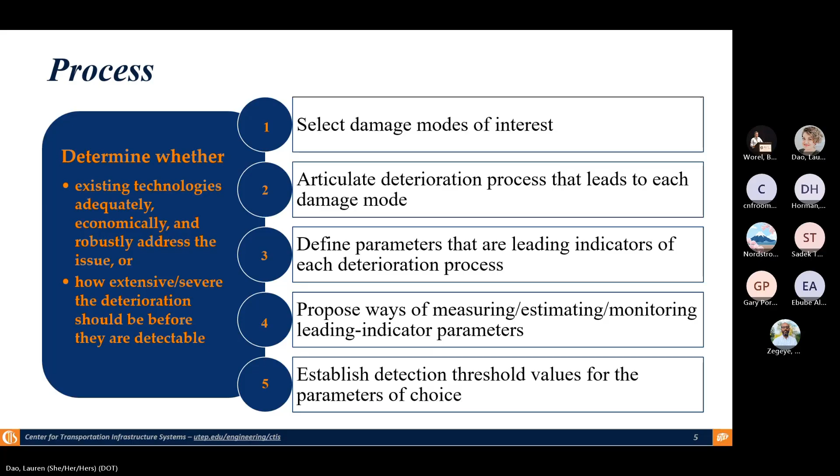And the third one is the traffic speed deflectometer. So 1 new technology we are maturing, and 2 really nicely mature technologies that we're doing. So on the dark side, I have what the objective was. So basically this is the process we went through with all the defects and all the systems. Select the damage mode of interest. You saw the damage modes that we discussed. Articulate the deterioration process, when you build it perfectly, in time what's going to happen, and see what triggers the initiation of the defects. And find the important parameters and ways of measuring, estimating it, and then establish a threshold where you can see stuff. So do whatever you're doing, but just be aware of the limitations of the analysis, mostly, and the process.

So what we did, we just went and started to simulate all these things that I showed you. We simulated the FWD on top of a pavement as realistic as we could, and the TSD, and then of course GPR. Essentially, we have an asphalt layer, and it can be several layers of asphalt as we're going to discuss, and then you have a base and a subgrade, and then we are looking at the deflection at different points, and we are looking at any possible combination of the moduli in the system. So it's a little bit time consuming, right? So for each one of the cases, we have around 400,000 to 500,000 simulations of pavements that we possibly can see.

I should use one example to show you what we did. First thing we did is simulate the response. For this case, I'm showing you an FWD because everybody is aware of it. We simulated several 100,000 cases of pavements with different thicknesses and different conditions and so on and so forth. Then we went to compute the indices. We found more than 40 indices in the literature as part of the state of knowledge. So we just used all of them and prioritized them. And then calculated percent change from a control. In this case, control would be when it's perfectly okay. In the real world, the control means when it's uniform and you're getting exactly what you want. And then flag the potential defect when the difference between the defective and the control exceeds the threshold. And I randomly put it 25% over here. So I want to see at least 25%, and I'm happy or confident that I can see something.

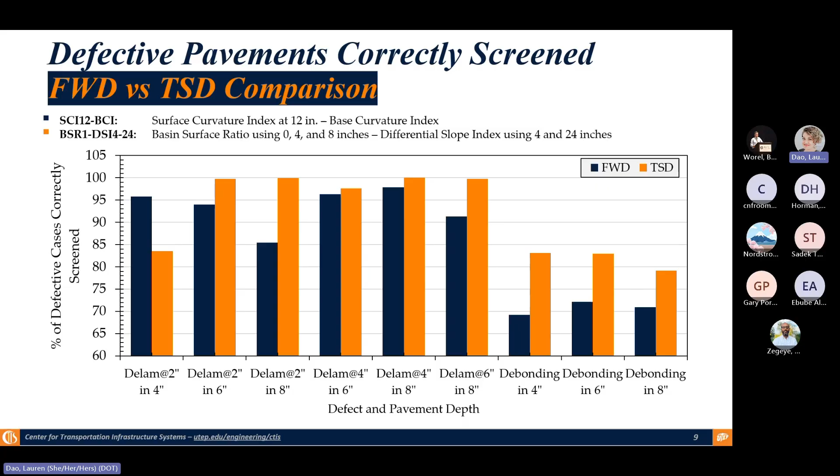Anyway, these are the types of work we're doing. And again, like Dr. Maser - sorry, we're getting into your business, I feel embarrassed - he's the guru. So he started now looking at the same thing, but we are focusing only on debonding and delamination, not thicknesses, because that's well established and material properties are irrelevant in this case.

And we started making the debonding and the delamination, looking at the separations from zero as control and so on and so forth. And then just trying to look at when we're going to really see it, when we're not going to see it, and develop a chart and guideline.

But that's all I have for the first one. I better wrap up - I'll be 11 or 10 minutes on this one, so I'm going to move to the next one. While you're changing, any questions? Again, I apologize, there's a lot of skip, a lot of processes and thought processes. I hope you got this.

So the next one we're going to start discussing is the TSD. Now this is a brand new, very exciting, very promising technology. And I'm old enough that I worked with the first FWD, so just to show my age - so I'm glad I'm working with the TSD now, and we're going to look at it.

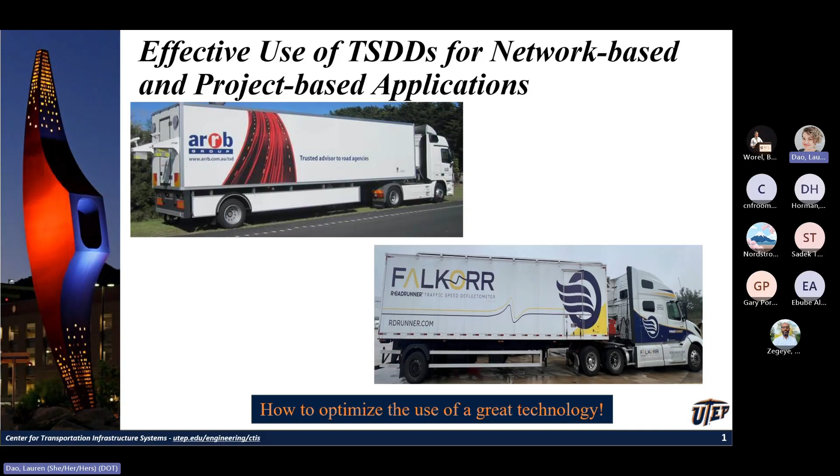So again, the goal here is to optimize the use of a great technology, right? You can do a lot of things theoretically, but as my dad used to say, you shouldn't do some things even if you can, right? So we have to balance the capabilities of the technology with what we expect from it.

On this one, I have a big group of experts and it's our technical liaison, and boy, it's so wonderful to work with. So we've been having a lot of talking about that. This is a great technology and it's improving daily.

We've been fortunate enough to work with it. I see Tom, you over here - 2007, working with Fugro and the project for him to conceptualize it. At that time no equipment existed. He was thinking that way ahead of time, and since then we've been doing that.

So the goal is how we can maximize the information to extract from TSD, given the state of it. Basically how to minimize the cost of data collection by avoiding areas where at this moment we cannot get it, and then give some feedback to the manufacturers to see how we can improve it - how can we change even the location of the sensors, which would help, and that's easy to do. That's the type of work we do - the goal is to balance the TSD capabilities at this moment with the analysis approach.

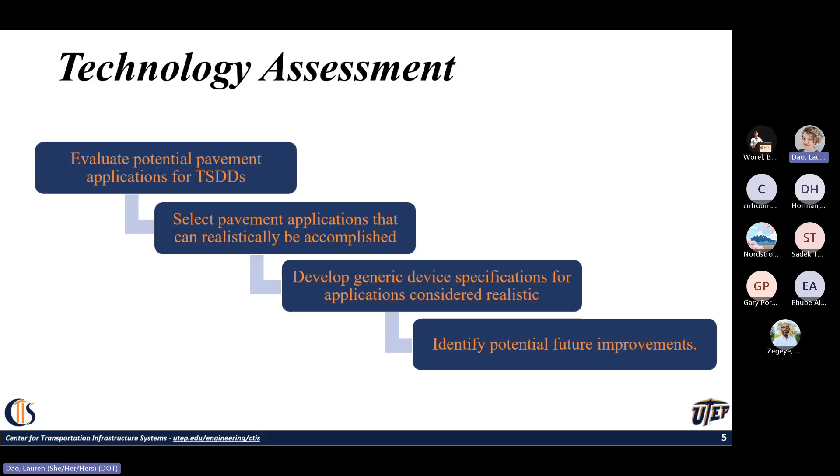But we have to look at that. So we just get a survey to see what the potential uses are that people want to see, and what applications, and essentially develop a generic specification for the device. That's what we wanted to do, and that's what we do now, and look at potential improvements.

So again, we did a really nice gap and SWOT analysis. We sent a questionnaire to all the DOTs, and a lot of you may have received it. What do you want to see from the device, and what do you see as the potential for improvement of the device? So that will direct our work, and we're just working on the initial framework.

I'm just going to go to task 4. That's where we come up with the framework, and this is a tiered approach. There's nothing new in this; a lot of people are working on this, but this is a bit on the tiered approach. It's hard to read, so I just color-coded it a little bit.

So the first step is the QC of the data. We have a lot of great data, but we also have a lot of data that doesn't make sense. Do we really want to spend a lot of time on data that doesn't make sense? Or do you want to average it and just bias your data and so on? So we look at that.

The second one is the processing of the raw data. One of the things is that the devices we have right now measure velocity, they don't measure deflection. For 40 years we are conditioned to look at deflection, and the first reaction is to go from velocity to deflection. It seems simple - it's integration - but it's not as simple when you start integrating, and there are all the problems with the integration. Unfortunately, most people use the deflection that the machine provides without looking at the relationship between the two.

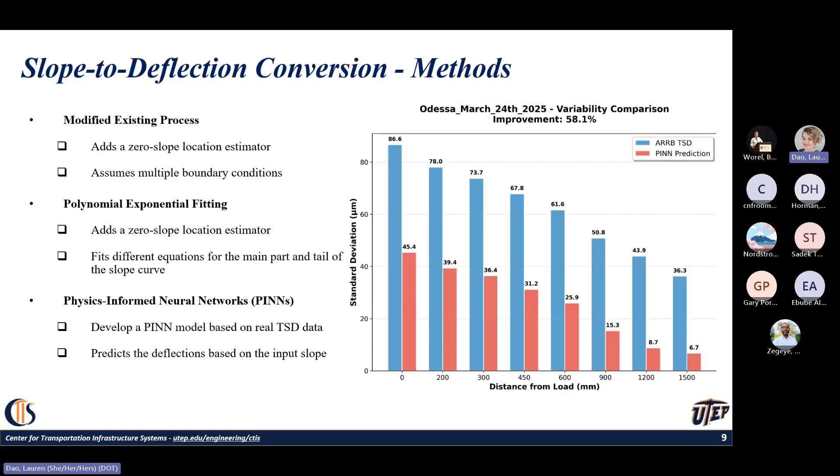The other part is basically coming up with the temperature and speed correction. Speed is a factor, but not a big one - temperature is. Keep in mind we have weekly data, so there's no damage, and we use that to guide us through the process and come up with the temperature correction. Our goal is to eliminate using deflection. Let's start slow - we have corrections for both slope and deflection that we've done.

At this moment we are done with the tiers and the QC procedure. We have applied it to the data, and I think there's a golden opportunity here - we have data from different times at MnROAD, and you can see how the quality of the equipment changes by seeing how much data is now bad, good, clear, and so on.

We're done with the temperature speed adjustment and done with improving it. There's no perfection - it's just too much analysis to do for over 200 miles of data collected in one day. But we improved it. We are working on the back calculation of the layer moduli.

Just a reminder of what we have at MnROAD as far as rigid or concrete sections. Right now we still have 27 mainline active test sections and 24 low line, with a mixture of different pavement types - joint plain, thin fiber reinforced on gravel base. However, those were very thin when built and are now covered with asphalt just to keep the truck running.

We also have an ultra-thin fiber reinforced concrete overlay that you should all be able to see on the tour, that's been out there almost 14 years now and still active in service. We still have a few original sections left - it's hard to believe, but they're just sitting out there, proving that if you've got 6 inches on a low line road and you build it well with good drainage, it's going to last a very long time.

Our main focus has been the lower carbon content concrete pavements. That's really what dominates the test sections on the MnROAD main line. We have 4 different projects going, evaluating the performance of those sections, with a lot of construction in 2022 and 2024. The low line, not so much. We haven't constructed anything since 2017, so almost 10 years.

And we heard a little bit yesterday from Julio on the construction of that DCSA section that's out there.

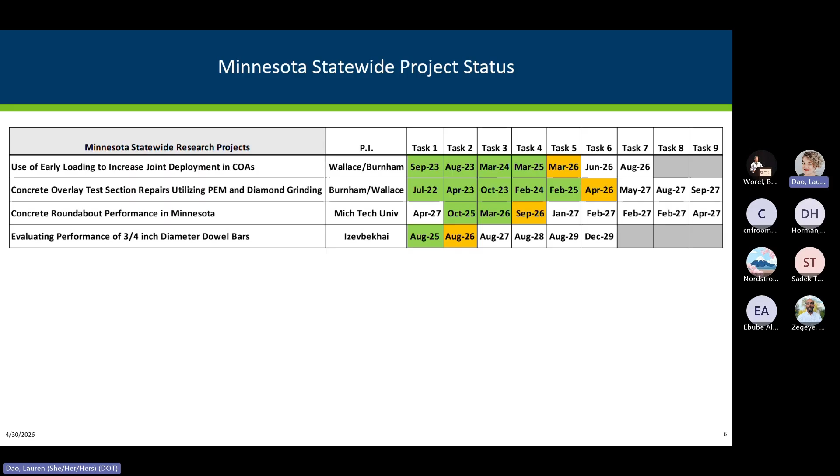So if you're ever interested to see where we're at and the results, all our task reports are posted - you can go to our website. And with that, I'm going to introduce Ken Maser, and he's going to give us an update on this 3D GPR project that we have going.

Thanks, Lauren. Thank you, Tom.

So I'm going to be presenting on this 3D GPR analysis of concrete pavement. This is an NRRA project. Shongtao Dai has been our technical liaison and extremely helpful throughout this. It's a joint project between my company InfraSense and Marquette University. My co-PI is Majid Hayat.

The initial objective of the project was to identify missing, misplaced, and misaligned dowel and tie bars, and also other defects in concrete pavement, including voids under joints, but the focus of the project has really been strictly on dowels and tie bars. So the issues we're addressing are various types of misalignment - this is a figure from the literature showing horizontal translation, longitudinal translation, skew in the horizontal and vertical plane, and vertical translation. These are various types of misplacements, plus simply the absence of the dowel and tie bars.

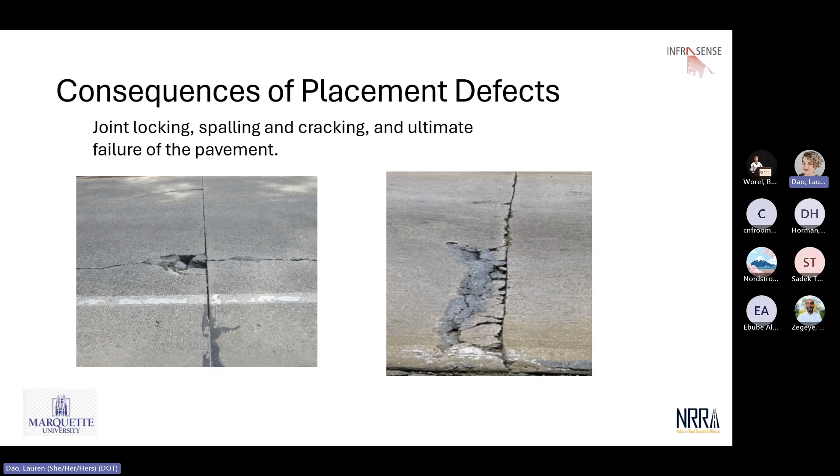The technique employed in this project is to use 3D GPR. That's distinct from conventional GPR, which generally uses an antenna or two antennas that go down the road and give you a single line of data that shows how things vary longitudinally, but you don't get much information across the width of the road.

They come in two different varieties. The ground couple is a unit that slides across the top of the pavement, and the air launch is elevated, and each has advantages and disadvantages, and I'll explain that in a second.

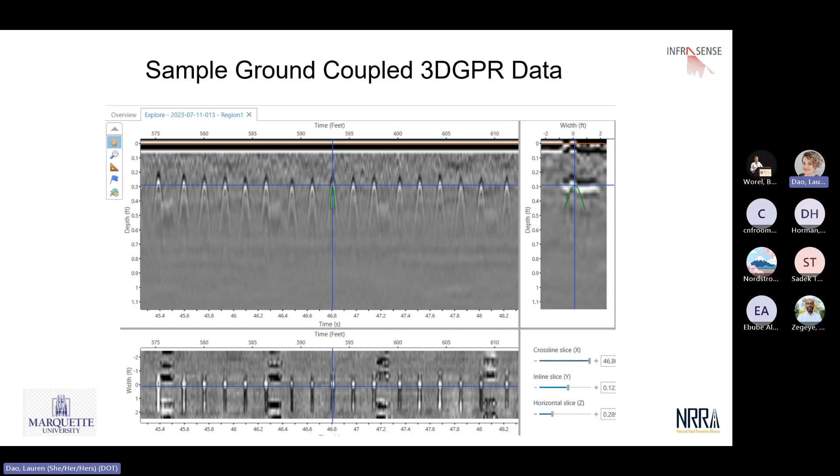And you look at the bottom here, you can very easily see where something is missing. There's no tie bar in this little gap here. So we can see it. We can see the issues looking at the data, but when you're looking at a couple of miles, you don't want to have to do this visually for miles of data. So the goal here is to really be able to automate the detection of these issues, and then the user can always confirm and go look and say, is it really missing there, or is it really spread? So that's really what we're aiming for.

So the algorithm that we have developed basically first tries to figure out where, in this big mass of data, the dowels and tie bars are. And then it goes to those locations and fits these hyperbolas into those locations to get points on the bars. Then those points are connected with a line to make a bar. And then we calculate the properties of those bars: the slope, the position, slope vertically, slope horizontally, etc.

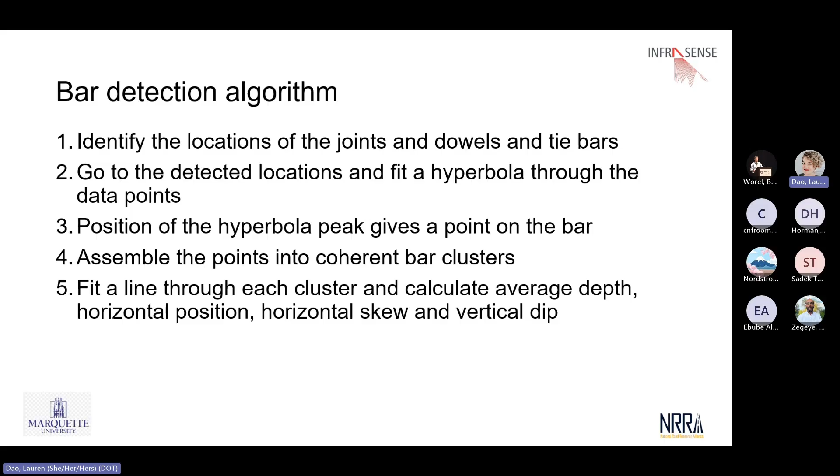That's how much data we're collecting. Each scan has 20 channels, so that's 2 million sort of channels of data. And each channel has 256 points, so that's 512 million data points. So we really have to know where we should look in this mass of data to find the dowels and tie bars. So that's really the goal of this step.

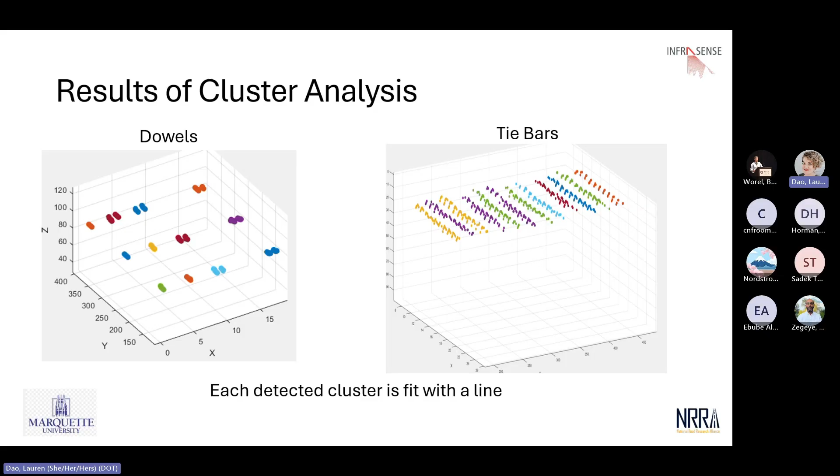So then we get a bunch of these points, and then we use something called cluster analysis. It groups a set of points that are in the same neighborhood. And the cluster analysis produces something like this. Each of these different colors is a different cluster. On the left are the dowel clusters, on the right are the tie bar clusters. So once we have these clusters, they're a bunch of points. All we have to do is fit a line through the points, and that line gives us our bar. And then all the properties of that line are the things that we're interested in outputting.

This data, by the way, is from Highway 23 in Wisconsin, right near Fond du Lac. And it happens to be a road where we knew from previous work had missing tie bars. So it wasn't just at random. But it was a good data set to do testing and development on.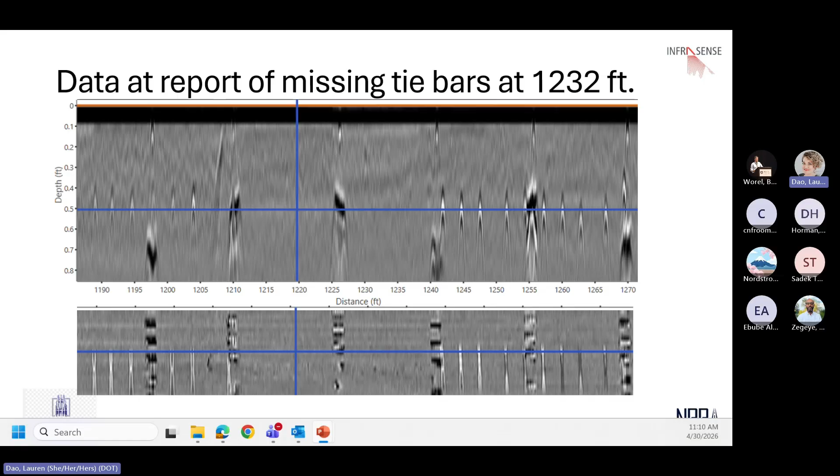Okay. So we felt we were finding what we need to know, but how good are we doing? So we went through a process where we established ground truth to see how accurately we are detecting bars. We established ground truth where there was a data set that had all the bars laid out. And then we went through the automated process and compared how our detections matched with where the bars were supposed to be located. And we wound up getting an accuracy on the order of 88 to 95%, meaning out of all of the dowel bars, for example, we got the locations between 88 and 95% correct. That's pretty good. It's not the greatest, but that was initial, and we've made some improvements since then, but we felt we were on the right track.

And this is just an example of how we did that. The blue circles are our ground truth. We had somebody just go in there and put their cursor on every bar they saw. And then the yellow ones are what the program came up with. And basically the accuracy was how close. If we use a criterion, like if we're within a foot of the ground truth, then we found it. And that's where we got those accuracies. You can see we did pretty well, except we missed a couple over here. But that's the process that went on.

So the goal is really to give the DOT folks a tool to do this analysis. So we came up with a graphical user interface, or GUI, as they call it. And basically the user can just select a folder and read in a file that has all the 3D GPR data.

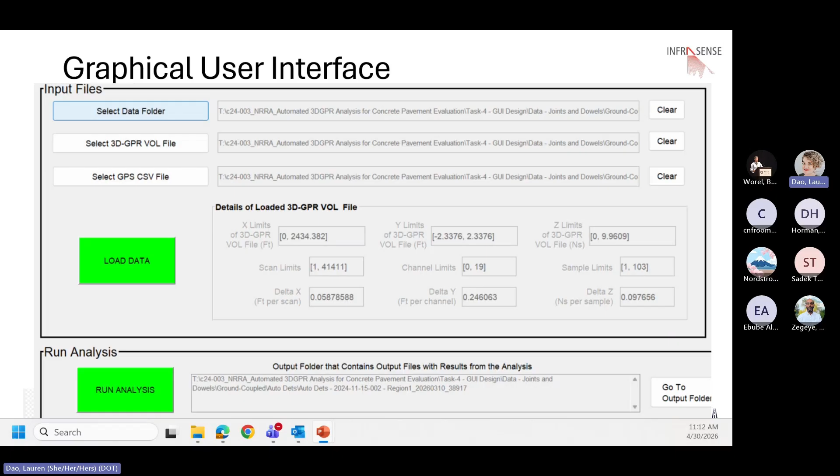It's pretty simple. There are a couple of parameters, or you can say, for example, I don't want to do the whole 2,400 feet. I want to zero in on between 500 and 1,000. So you can do that. You can say, okay, is this data ground coupled or is it air coupled? You can choose that, and you can choose, do you want to do a joints and dowel analysis or a tie bar? So the two separate kinds of analysis. So that's pretty much it.

So you just say run, it runs, and then you can do something which is similar to what I just mentioned, is do a query. You can say, for example, find me all of the dowel bars that are spaced more than 2 feet away from the neighboring dowel bar. That's a query, and it will spit out results just for that query.

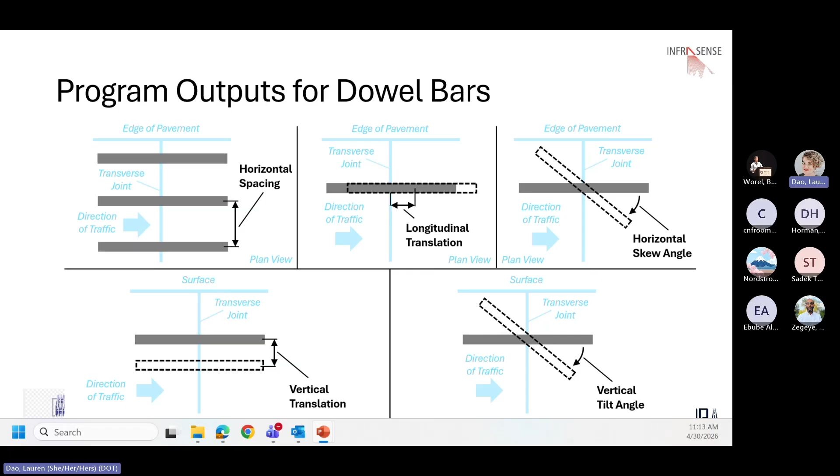So the things that the program is outputting, similar to what I showed before, is horizontal spacing, longitudinal translation, angle in the horizontal and vertical plane, and vertical translation. And there are 4 kinds of outputs. There's statistical output, where we see how these things are distributed.

You also get tabular output, where every single dowel is shown and where it's located and what its lat long and what its depth, spacing from the neighboring dowel, longitudinal translation from the average joint location and the angles.

And then we can get GPS, or what's it called, Google Earth. It'll plot out all the dowels, the yellow points. And then we can import it into that program that shows where those points are relative to the GPR data, so you can see how things came out. So that's kind of handy.

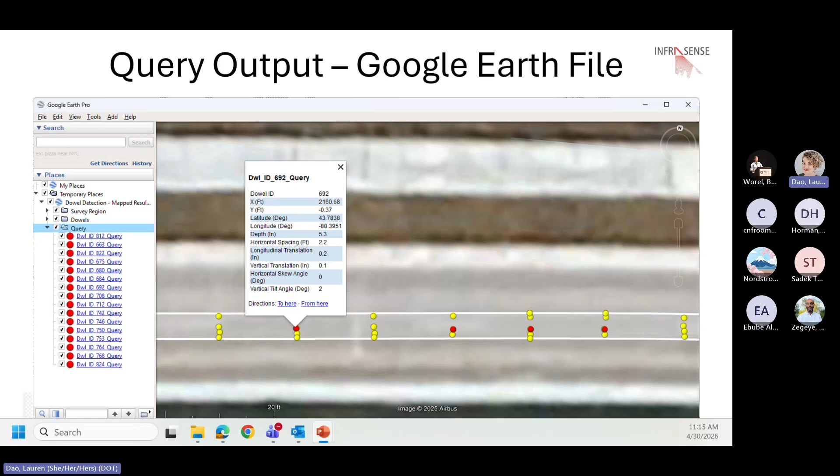I mentioned the query. So this particular query was find me bars that are more than 2 feet from the neighboring bar. And you can see the red dots are the result of that query. So it finds those things pretty well. You can also just, whoops, there's something else here. No, okay. So that's where we are.

The status is that the software has been tested on a select number of road segments. A preliminary version has been supplied to the TAP members of the team, and they're trying it out. We've got some feedback. Based on the feedback, we've made some improvements in the accuracy. We also made some improvements in the processing speed, and we are coming up with another version that we're going to be delivering in the next couple of weeks. And the project should be wrapping up by the end of July. Final report. So that's it. Thank you.

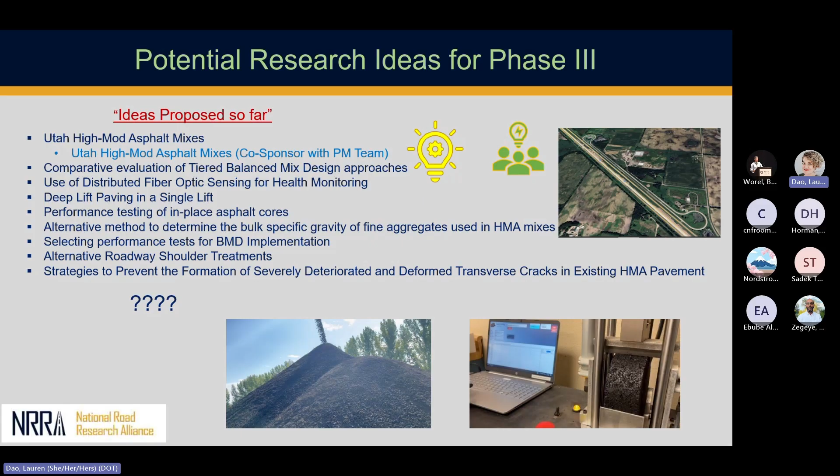So it's going to be exciting going into phase 3. Hopefully we'll get some of these ideas going where we get some test sections and maybe some lab studies or synthesis or something. Maybe all 3. And also, as Mike went through this morning, what can we do as a flex team that benefits the other teams? I think it's good to work with the other teams, share research initiatives and things like that.

Also, maybe focus on how we implement these things too. So while I'm excited about phase 3, I'm also excited about the research we've got going right now, and I think we've got a lot of things going that are going to answer a lot of questions and needs for other agencies, like how much RAP can we use? How can we make our pavements more perpetual? How can we control cracking, whether it's load related or reflective or thermal? So I think our research is really on point there.

Mostly I'm up here today to thank everyone, all the Flex team members, for all they've accomplished and all the successes we have. And I also want to thank Kurt and Mark and Ben for leading us, and Lauren for all the things that she coordinates. Also, I want to thank Mike for helping me with all my charities. I don't think a week goes by that I don't talk to Michael.

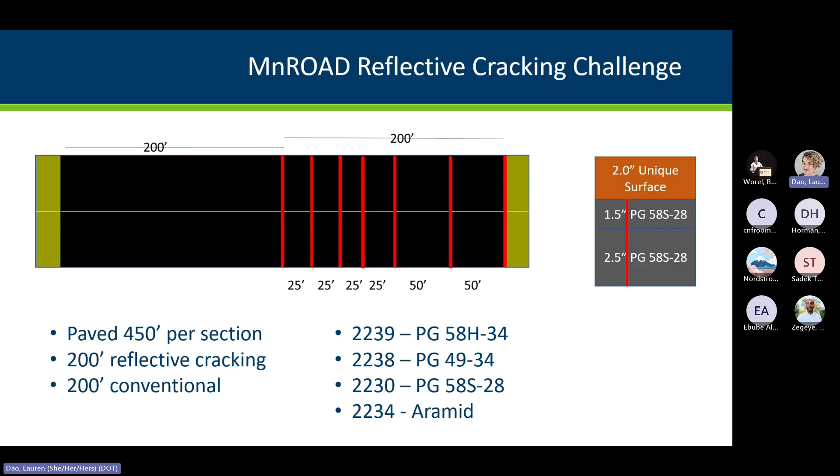Our first crack—we did not have any cracking through the first 2 winters. Then prior to Martin Luther King weekend in 2025, we had a cold stretch coming. I called Jacob Calvert on a Friday; he was able to go out and check the sections. We had no cracking. We had a holiday weekend, and Jacob was back out there on Tuesday. We had cracking. We went and documented it, so we were able to isolate it to a single weather event where we got our cracking.

This year, as winter came, we did a similar thing with closer monitoring as we had some cold temperatures. We got a single low event in December that was minus 27 Celsius, and then our cold snap again this year with Martin Luther King weekend, all the way down to minus 30. Additionally, we got more information on whether it's low temperature extreme magnitude, or more the duration held at lower temperatures—very detailed information that we can dig into and provide Bill detailed values for the monitoring or modeling things he showed yesterday in his presentation.

So surrounding these dates and temperature swings, Jacob Calvert and I did a lot of distress surveys in January. Just focusing on January and the 4 sections I'm highlighting: the PG 58H minus 34, one of our common modified MnDOT binders, going into January had 2 out of 7 sections cracked and really didn't change a whole lot.

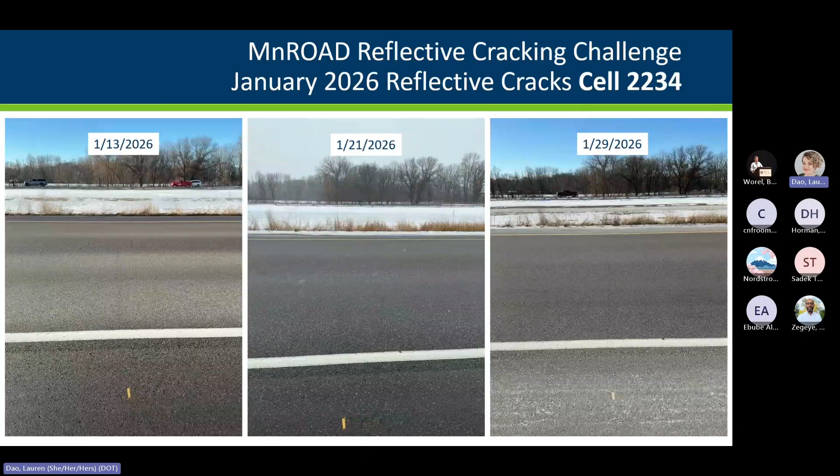And then the Aramid fiber, so this was no cracking, and then on the 29th, there is cracking. Just to show you what we're talking about, when we say there is cracking, you follow it up through the edge stripe and there is a crack there. But that's how difficult it is to see, or how tight those cracks are.

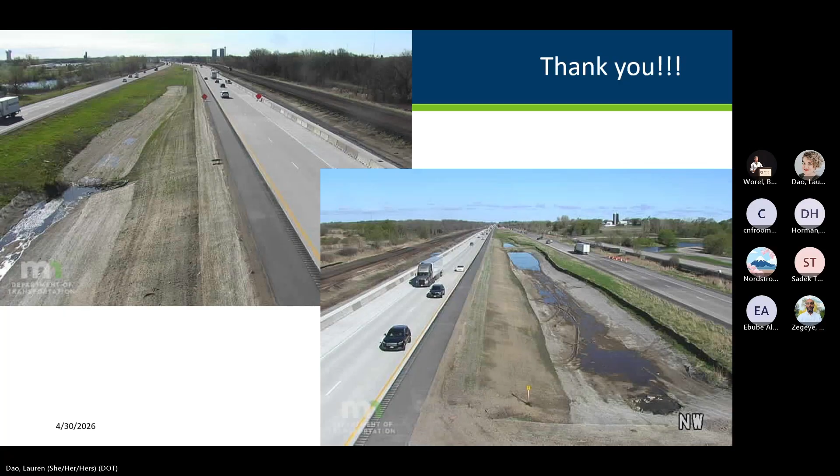All right, I'm going to try my best for us to be done in 12 minutes here. Mic is turned off. How about now? Awesome. All right.

Lot of people to thank, obviously Mason Khorshidi and Sadek Tormos, graduate students working on this, doing most of the work. And as you saw from Michael's presentation, all the time and effort that him and Jacob have put into these sections and collecting data for us. It's not just me, the research team, it's myself, NCAT, and also Heritage Group. They're all part of this team together with folks from MIT with the presentation that Dr. Butler made yesterday.

All right, that's going to work this way. So I won't go through the objectives and things like that. I think pretty much everyone in the room at this point knows why these sections were constructed, what we are trying to accomplish. You already know where they are. Michael's already shown you what the layout looks like. He's already told you about the different materials that are used.

As mentioned, this is a companion study to the additive group experiment. That's, again, a joint effort between NCAT and MnROAD, a pooled fund. And here we have some sections that are in addition to what are part of the additive group. So you do have a section that's the 58V minus 34 control, and then also the underlying mix that we have with the 58S minus 28 that doesn't have any of the additives in there.

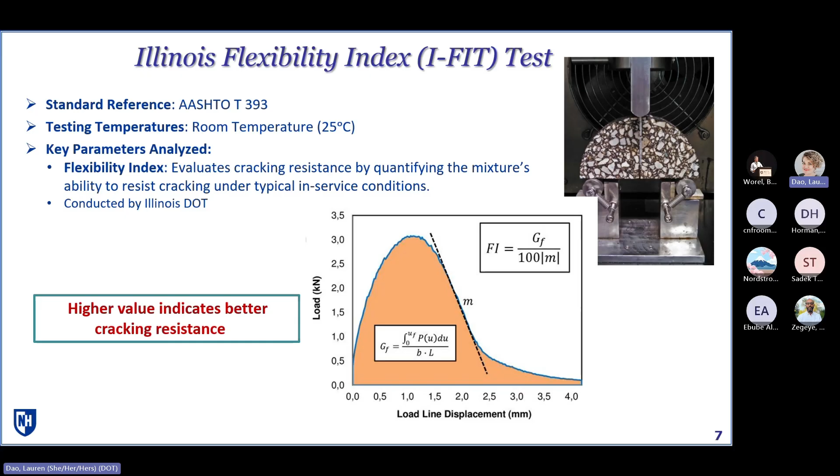Illinois DOT ran these tests. Our minimum testing requirement for Mercy is that we do everything on reheated mix with the critical aging procedure, essentially 6 hours at 135 degrees Celsius mix aging, which is one of the procedures in AASHTO T393. Illinois DOT also uses another procedure in AASHTO T393, where a compacted SCB specimen is aged at 95 degrees Celsius and then tested.

Since that's their default, they also did the alternative long-term aging, and you can see the effects here across all the different materials that Michael showed you. As we can see, most of these mixes do meet Illinois DOT's threshold of 7.5 on reheated mixture, except for that control, which is also the mix that had already cracked in 2025.

So you can already start to see that lab testing is aligning with what we saw at MnROAD. Bottom line: the 58S minus 28, and also the 58 minus 34, or 58V minus 34 control, had the lowest FI, which are also the ones that actually showed the most inferior reflective cracking performance so far. Some mixes, especially wet rubber, are very resilient to aging—we didn't really see much transition in its properties after aging.

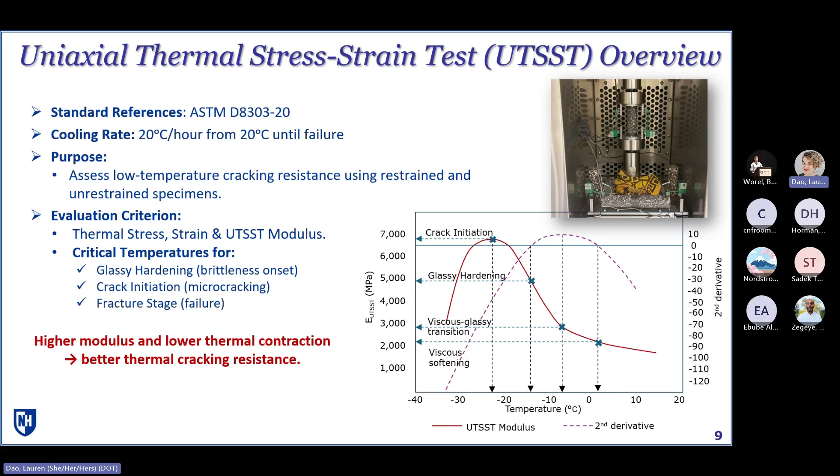We set this up last year and conducted tests on all the Mercy mixes. Because it uses so much material, we had to focus on testing only long-term aged material, since you have to construct two sets of samples for every single test—one restrained and one free. You get stress data from the restrained one, strain data from the free one, and then run multiple replicates.

Just showing a snapshot of one set of results—what we're looking at here, if we pay attention to these bars, think of it as mixture-level thresholds similar to your PG grading system. In a PG grading system, we have a low temperature grade, which is the temperature at which things like the M-value go below 0.300, and stiffness goes over 300 megapascals. Here, we're looking at temperatures at which the behavior of the material goes from having stress relaxation capability to a more glassy response, and the temperatures at which those restrained specimens would actually crack.

So if you think about the old TSRST, you just get this red bar. Here we also get this transition of materials from viscoelastic to glassy state. Once again, you can see that even if you have just minus 34 grades, that doesn't mean all of those mixtures give you the same temperature at which cracking can happen. These lines are set up with the PG grade line—so minus 34, minus 28, and so on.

Once again, no surprise there, minus 28 didn't show as good of a mixture cracking. You don't expect this minus 28 to match with this, because that's on binder, this is on mixture, different rates, things like that. But overall trends agree with what we had seen, and you can also see how the fibers have done quite well here, and also some of the rubber mixtures, the dry one did quite well.

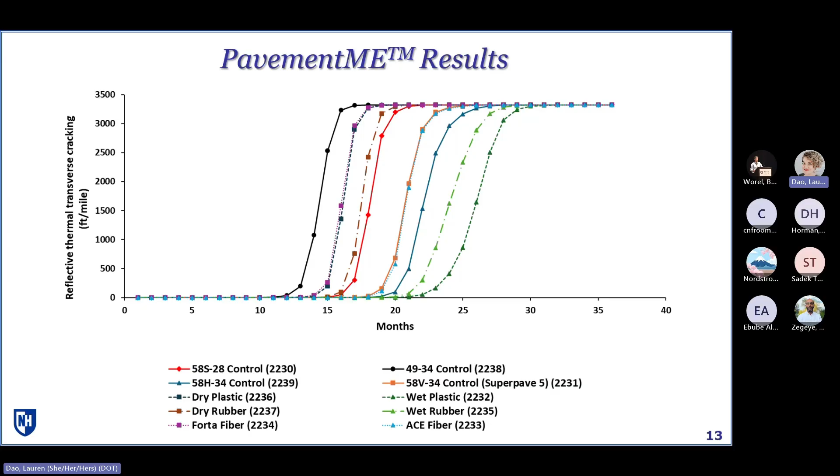But we wanted to also see how to convert this into a single number or index to make comparisons. We did what we had developed in the previous NRRA effort. All this index does is it looks at the area under that S-shaped curve and normalizes for time. The reason to do that is so that you can essentially give credit to mixtures that crack later than earlier. So that's the only advantage here by using this type of index.

So if we look at results in terms of this index, higher number is bad. That means that your mix is cracking at a faster rate and is cracking earlier. You can again see how different software predict it.

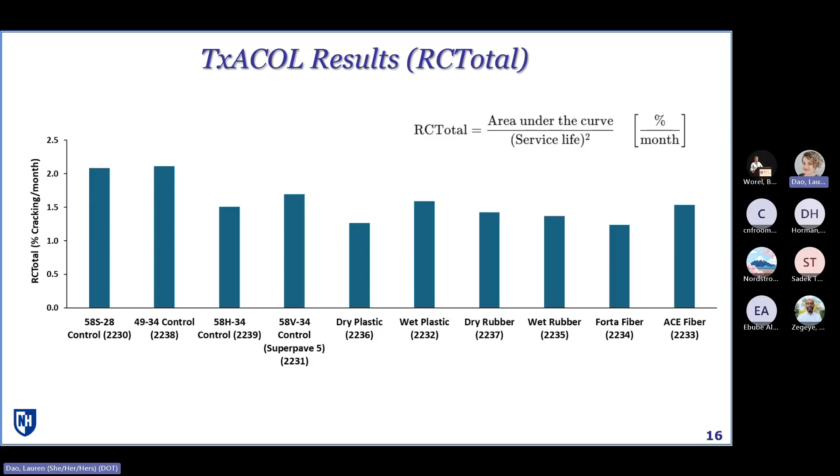With TxACOL, again, if you compare to what Michael showed, this one does a little bit better, especially for the additive group mixtures. Once again, that 4934 Rockstar mixture in field, the model doesn't really see that benefit.

So we do have some comparisons, and again I wouldn't go through all of them, but just wanted to highlight that if you look at these different types of models, you can really end up with any scenario that you want, is the takeaway, right? So we need to make sure that we are doing a good job comparing to field, and that's the whole reason why we construct pavement test sections and not just rely on models.

So where we are now, we have done these models, existing packaged models, and now we are doing what Bill...